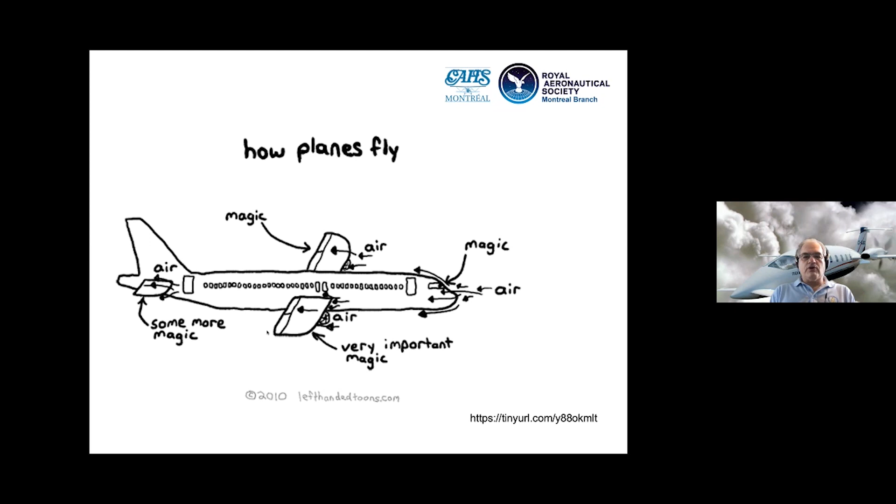Okay, so this is the first of the technical slides. I hope I don't lose anyone at this point, but this comes from a group called lefthandedtoons.com, and each of the slides has sources listed. Most of these are public domain slides, and the references are on the slides themselves. Their claim to fame is they draw all their pictures with their left hand, even though they're right-handed people, but I think it does capture almost all of the topic material for today. We see the air hitting the airplane, some magic happens at the front, some important magic happens in the middle, and more magic happens at the very end, and the end result is the airplane flies successfully.

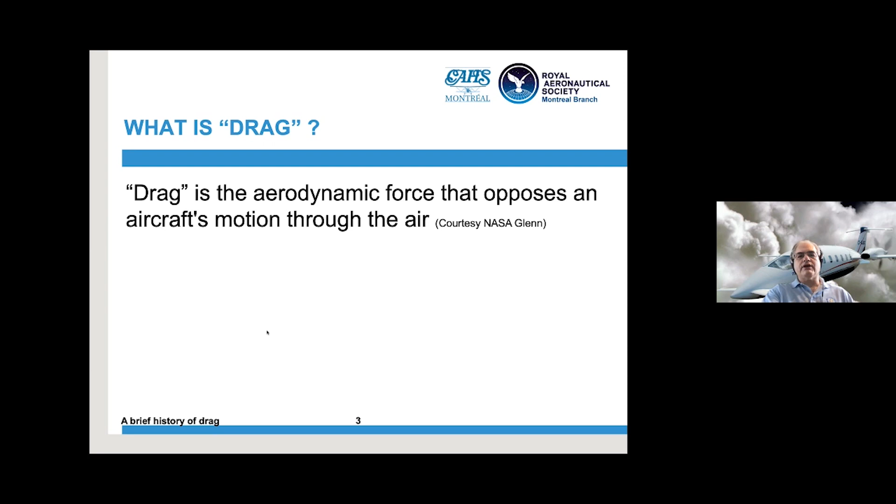So we're doing a speech on aerodynamic drag, let's find out what we mean by that. One definition from NASA Glenn, since I'd like to use high-powered sources, is aerodynamic force that opposes an aircraft's motion through the air. Okay, fair enough.

One of the key points about aerodynamic drag is just how long we've known the important science behind it, and just how long it took us to apply that successfully. So let's have a look at a few people and some dates.

Everyone in aeronautics has heard of Bernoulli's theorem, published in Hydrodynamica in 1738, and we'll see a theme that recurs: Bernoulli wasn't the one who published Bernoulli's equation. It was published by Euler in 1752, and there's enough there to more or less design any sort of subsonic airplane.

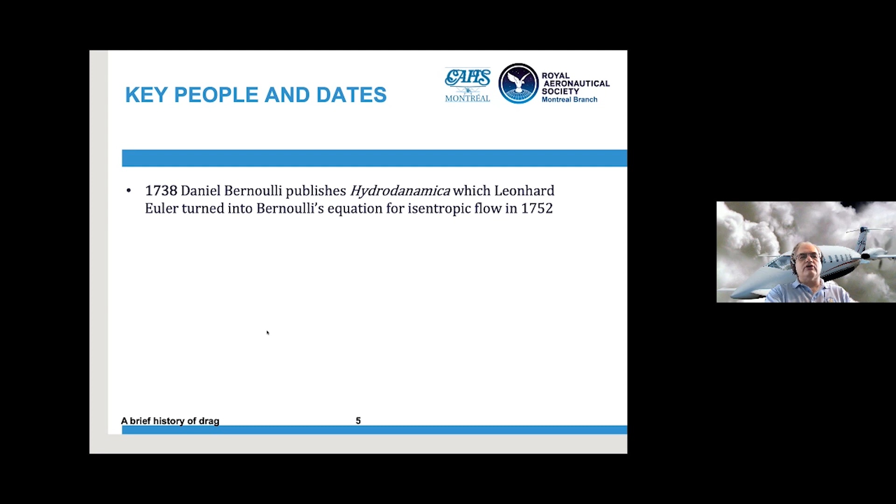A gentleman named Claude Louis Navier, with his colleague George Gabriel Stokes, derived a pair of equations called the Navier-Stokes equations of motion for viscous flow. The date is 1845, 60 or 70 years before the Titanic. These equations effectively fully define what viscous flow will do, and we'll look at them in detail a bit later on. 1845.

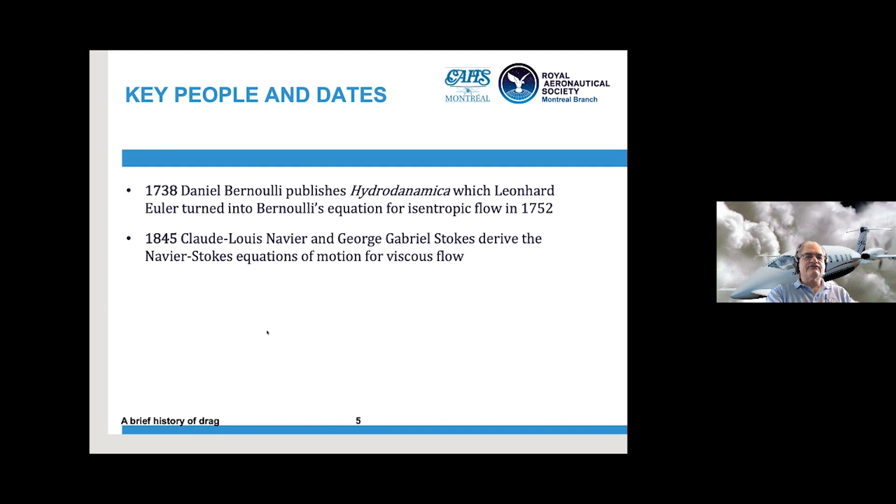Mr. Stokes was actually prolific, and he discovered another concept, which Mr. Sommerfeld decided to name Reynolds number after his friend Osborne Reynolds, who published it in 1883. So it took 30 years for Mr. Reynolds to publish Reynolds number, which wasn't even his invention - it was George Stokes' invention, publicized by Arnold Sommerfeld. So you can see the path can be somewhat tortuous before we get to the end. But Mr. Stokes did come up with Stokes' law, and the metric kinematic viscosity measure is called the Stokes, so he did get his claim to fame.

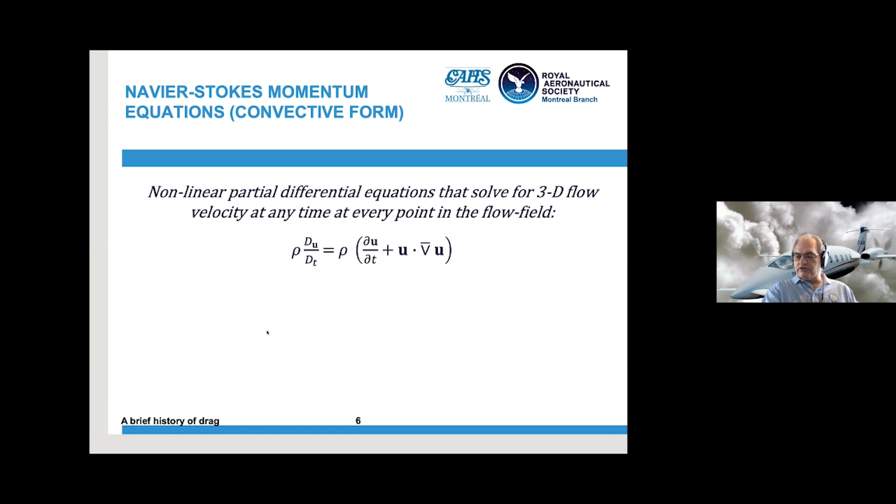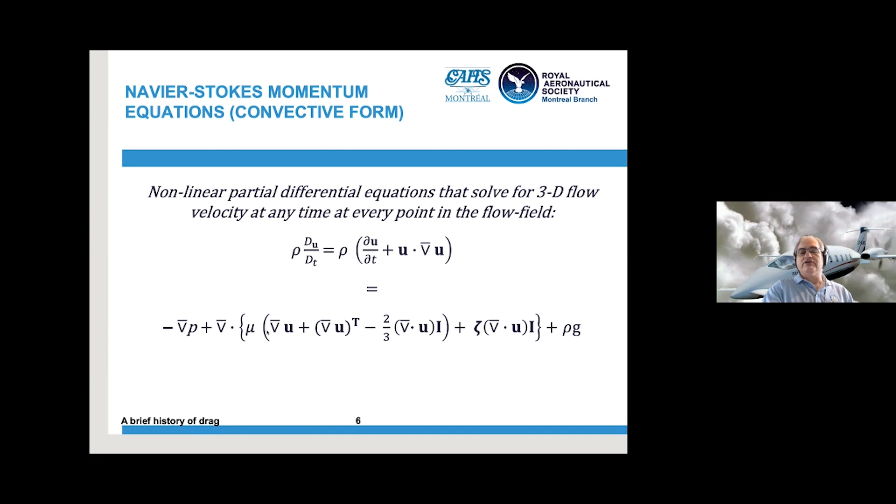All right, let's talk about the Navier-Stokes equations. I know all the aerodynamicists are dying to address these things. So here they are - a fairly straightforward continuity momentum equation, and the terminology is standard. nabla is divergence, nabla dot u is expansion rate. We can expand it relatively simply into this form, where we introduce zeta, the second viscosity term, volumetric viscosity, and then of course there's a hydrostatic term on the end. Pretty straightforward, as you can tell.

No, I'm just kidding. If you can solve this, the Clay Mathematics Institute has $1 million for you. It's been characterized as one of the most difficult mathematical problems to solve, and without gross simplifications, we don't even know what domain there's a solution of these equations across. What they do is fully define what the speed of a particle will do in viscous flow - viscous meaning sticky, think of treacle and honey as opposed to water. Ideally they'd give us the complete aerodynamic solution for every particle of air, if only we could solve them, but we can't. All we can do is make a bunch of approximations and then try to model around those. I just read a paper about someone solving these equations for air flowing over a surface with a step in it, and that's how much it had to be simplified.

These are the basis for all of our computational fluid dynamics, effectively, in the many forms that these equations have.

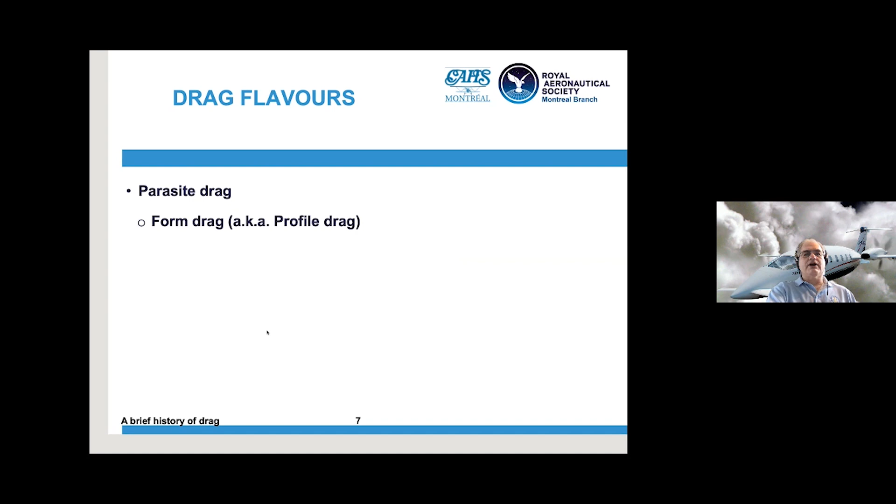Now let's get back to our main topic, drag. What kinds of drag do we talk about? Well, we have parasite drag, composed of form drag - sometimes called profile drag, which is drag arising from the shape of the thing you're flying around. Part of parasite drag is skin friction drag, we'll come to that in a moment - it's self-evident what we mean by that. Interference drag is when we have two components, such as a wing and a fuselage, butting up against each other, and the airflow doesn't know which way to go around that, which tends to cost us in drag terms.

We have wave drag, which results from the formation of shock waves. It happens anytime an aircraft is transonic, meaning that no matter what speed the plane is going, some part of the flow achieves sonic velocity. And then we have induced drag - drag caused by the production of lift, nothing else. If the wing is lifting, you have induced drag. So there's our drag story.

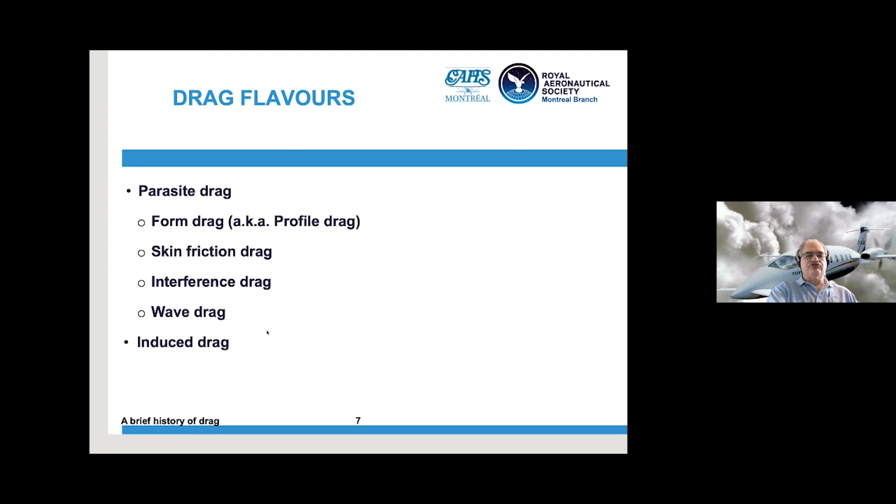We're going to look at each of these in turn. So parasite drag is everything except induced drag. As we said, it's profile or pressure drag.

It's caused when the boundary layer, the thin film of air adjacent to the surface we're interested in, effectively is as thick as from touching the surface, where the air doesn't move relative to the thing we're looking at, all the way up until the air reaches the same speed as the surrounding airflow, not affected by the skin of the vehicle. Boundary layers can be almost invisibly thin, a millimeter or two, or they can be inches thick, depending on the situation.

Interference drag we've discussed, and skin friction drag we're going to look at next.

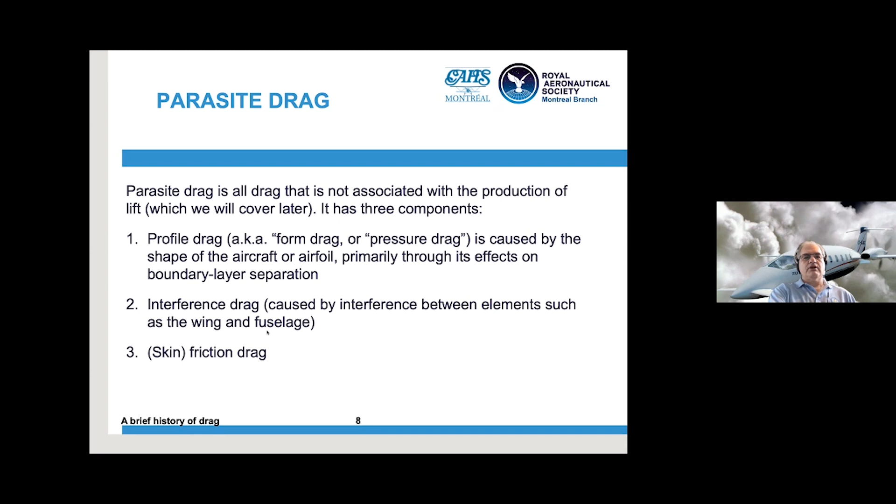I know that I said I promised to talk about the space shuttle and skin friction from re-entry. We know the space shuttle does whatever it is, 17,500 miles an hour, Mach 25, and it gets very, very hot because of skin friction. No, it doesn't. Skin friction has very little to do with it.

I think the easiest way to deal with this, I'm hoping — Fatty, give me a thumbs up for the cursor over the fuselage here. Yeah, okay.

So let's imagine that the air was a series of small sanding blocks like you would use in your workshop. We're going to take one of these sanding blocks at the nose of the vehicle and just scuff it all the way down until the very end of the vehicle, then taper off at the back. It doesn't take much imagination to realize the sanding block should be getting hotter and hotter as you keep scuffing, so that the hottest place you would see is at the very back. We start sanding and it gets hotter and hotter, and at the end the block is very hot and everything should be smoking.

Think about it — if it didn't, the fin wouldn't work, right? It wouldn't have an aerodynamic effect if it wasn't seeing a lot of airflow. But it's cool. It's absolutely cool.

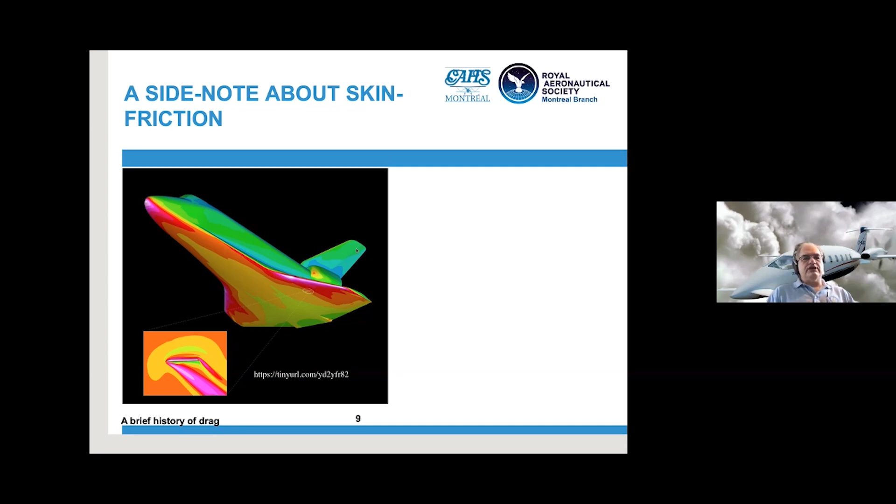So skin friction doesn't seem to be the culprit, and part of it is because the space shuttle, even at Mach 25, isn't seeing most of the dynamic pressure that it's flying through, and we'll see why in a moment. Let's look at a couple of statistics.

About 80% of the heating is caused by adiabatic compression. Adiabatic compression is when you don't add heat from the outside. The classic example everyone gives is the bicycle pump — you pump up your tire, the tire gets hot. Why? Because you're doing work to compress the air, and that work shows up, manifesting as higher pressure and higher temperature. So the space shuttle is effectively pushing a wave of air in front of it, which is causing the air to be compressed and hot.

It also causes shock waves, which we'll see in just a moment. But that's 80% of where the heat comes from.

And to give you an idea with a little bit of math, obviously the superheated air can actually break down the molecular bonds in the air and conduct and convect to the vehicle. Viscous friction, which is the stickiness of the air, does actually heat the atmosphere, but it's long after the space shuttle has gone by. It's all the turmoil amongst the molecules, exactly like when you stir a liquid very fast — it gets hot. That's what's happening there, but it's not what's affecting the space shuttle.

So in actual fact, a study by Alan Eggers in '58 showed that the heating varies inversely with the drag coefficient. What does that mean? Well, we'll have a look at that in a second.

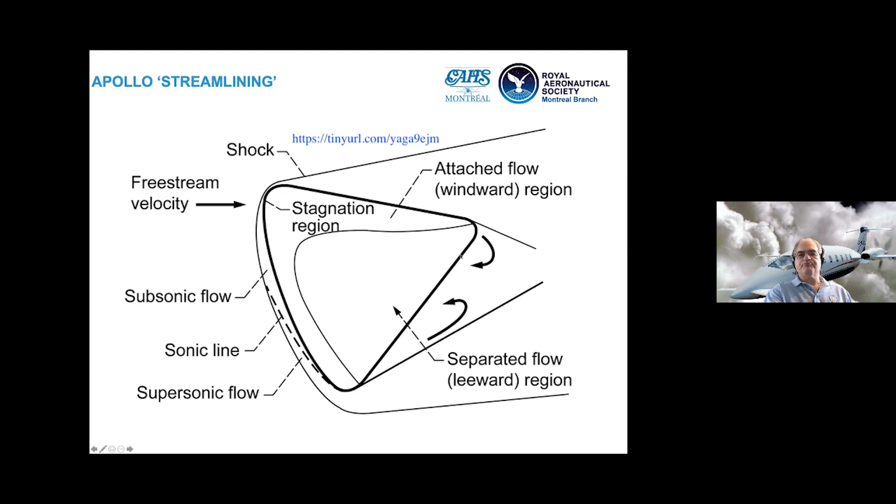Now, you can tell that Rockwell, when they designed the space shuttle, went to extraordinary lengths to streamline the vehicle. No, they didn't - in fact they haven't tried at all. If you look at the space shuttle, it is full of protuberances, tiles with edges on it, bumps in the cockpit. Looks a bit like a Vickers Viscount, if anyone's familiar with the Viscount historically.

You've got the OMS, the Orbital Maneuvering System pods at the back that are just strapped on like a Lego accessory. The wing has this DC-3 aerodynamic profile. There's almost no effort at all to streamline this thing.

And ironically, why is this? These things are seeing the same airspeed as the space shuttle sees when it re-enters, the same actual dynamic pressure as the space shuttle sees. I hear groans from the crowd - that can't be right. Well, let's have a look at some space shuttle numbers.

The target velocity is 290 knots equivalent airspeed - just think of that as the airspeed that the space shuttle feels. Now, how can it be so low? Well, there's a couple of reasons. One is, as I said, there's a shock wave that slows the air in front of the space shuttle as it's re-entering, and by the time it's subsonic, it really is seeing that low an airspeed.

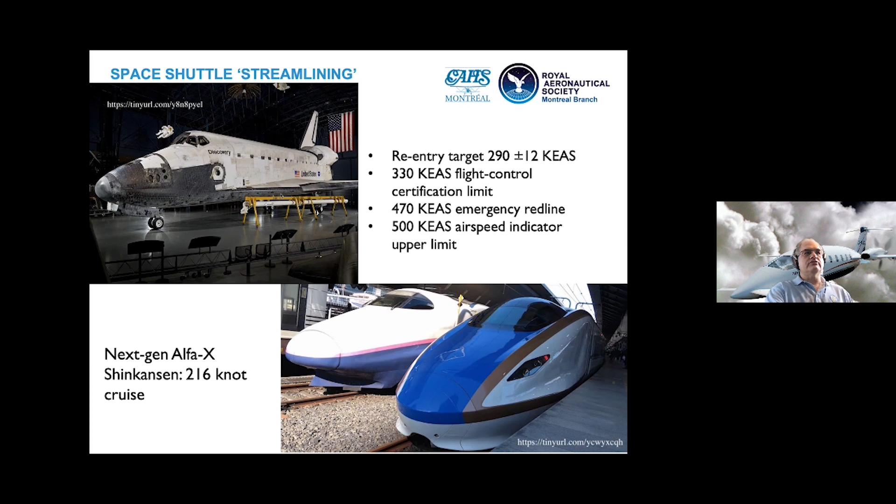In fact, the control surfaces on the wings during the shuttle's ascent, most of their effort is to try and relieve the wing bending moments so that they don't break the wings off. So the surfaces actually move not to control the vehicle, but to reduce the flexing on the wings as it ascends.

Back to our historians - so the aerodynamicists can go and refill their coffee at this point.

The Wright brothers wind tunnel here - a 30-mile-an-hour wind tunnel, 1901. You get an idea of the scale because they conveniently provided us the bicycle wheel, and it also historically, the context, of course, they were bicycle makers. Amazingly prescient to come up with a wind tunnel. We take these things for granted, but there weren't wind tunnels in that era, and they not only invented the airplane, but they invented the technology to invent the airplane. But it leads to some problems.

I'm going to go back to the aerodynamics for a moment and look at the drag equation. It's not complicated, and we'll just spend a moment on it. Unlike the Navier-Stokes equations I was kidding about, this is relatively easy.

D is our drag, and drag is a force, so it's measured in force units, whether newtons or pounds force, depending on which country you're in. Rho is the density of the fluid, the air density, the atmospheric density. U is the velocity - U for velocity, not V. We use V for something else in flight testing. We use U, V, and W, and they're not the way you'd think. So U is the velocity.

As you can see, there's a squared term in the middle. So double the speed, 4 times the drag. And in fact, power depends on the cube of the speed because of the relationship between power and force. So if you want to double the speed, you need 8 times the power. That's why you don't see a lot of supersonic propeller airplanes out there.

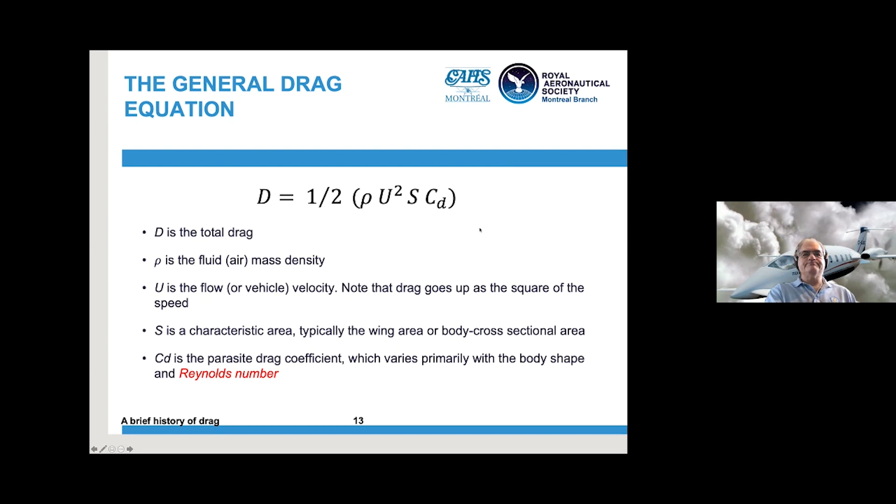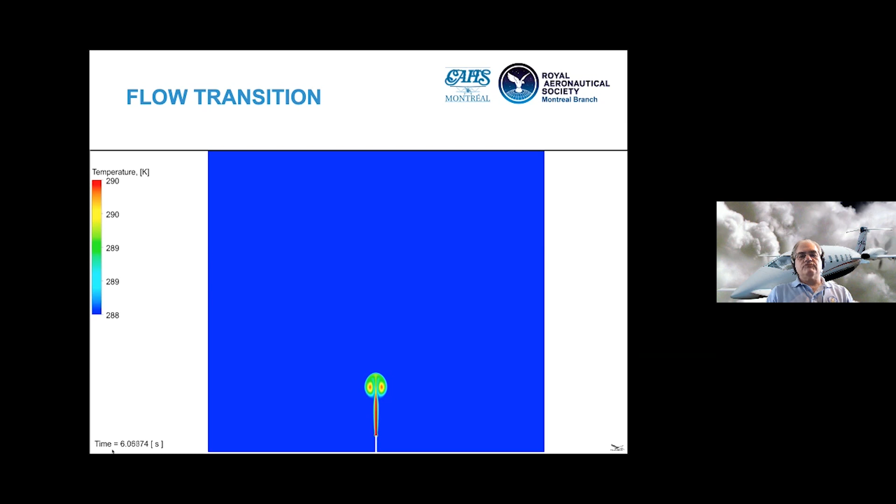We'll take just a moment to have a cigarette, if I can make this work. What you're seeing is a smoke plume coming up from the bottom of a cigarette, and you can see it's straight as an arrow as it starts up. It's ascending by convection - it's hot, so it goes up relative to the rest of the atmosphere. Notice how it's laser straight. By the way, if this was a tap with water coming out of it, it would have the opposite effect - it would start pouring straight, but look what happens here.

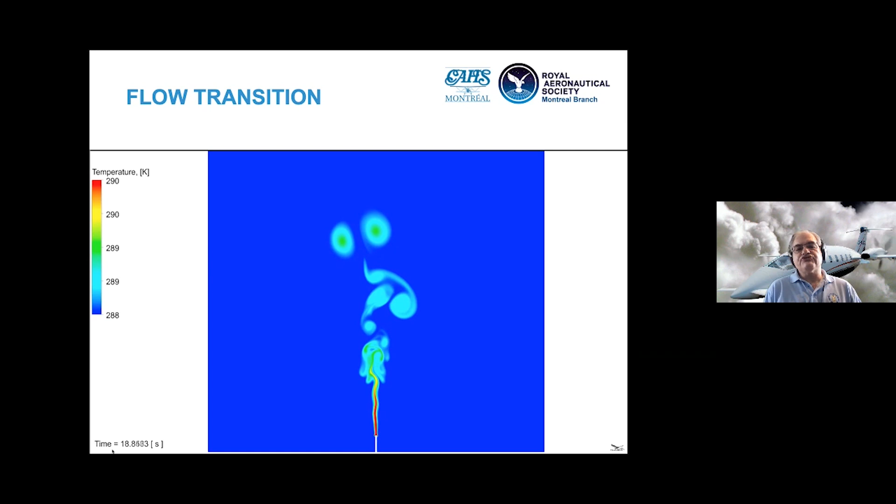For no apparent reason, the flow first starts to get wiggly, and then it breaks up into these vortices. What you are seeing, if it were a boundary layer next to an airfoil or a fuselage, is a transition from a laminar boundary layer, which is the straight bit on the bottom, to a turbulent boundary layer, which is the connected oscillating bits halfway up, to a separated boundary layer, which is all the turmoil vortices you see up high.

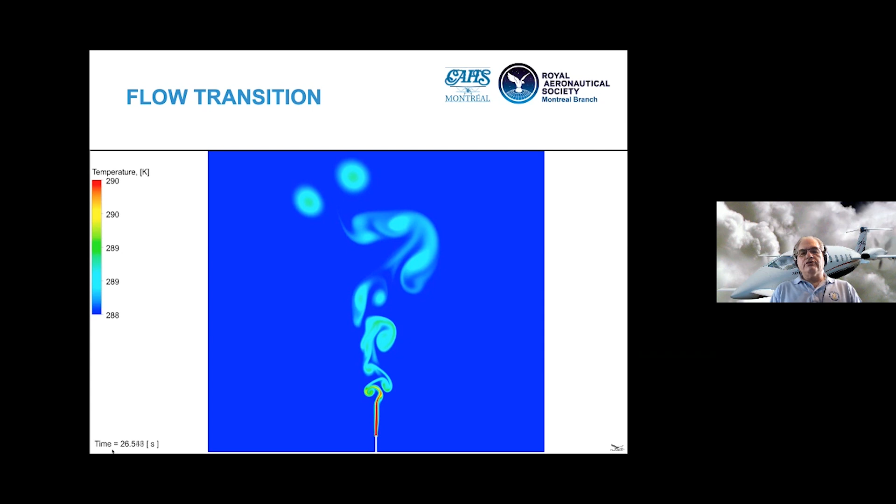For a given air density, the transition between laminar, turbulent, and separated flow is strongly a function of Reynolds number. Basically, if you think of a wing, the airflow starts flowing over the front of the wing, generally in a laminar way. It doesn't hang on laminar very long, usually - it becomes turbulent, the boundary layer becomes turbulent but still attached to the wing, and then it eventually separates towards the back of the wing, and that's what we have.

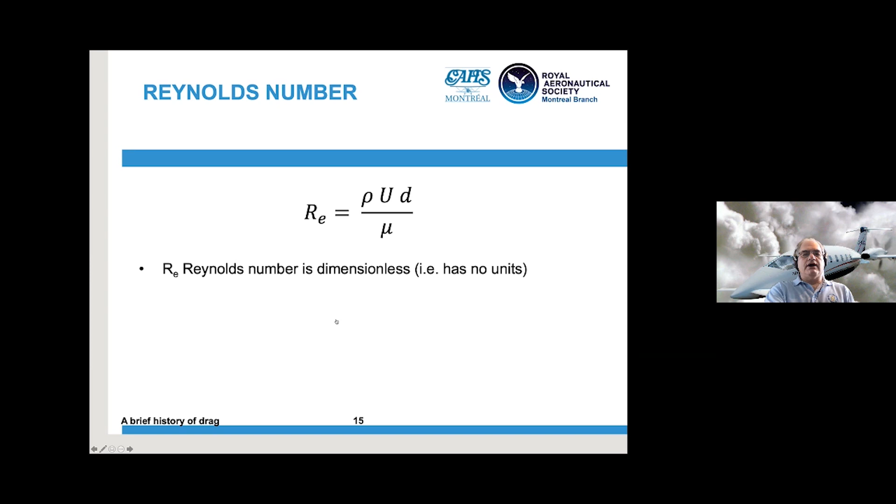So let's have a look at Reynolds number. Again, a very simple equation. The point of Reynolds number is it has no units - it's just a number, like Mach number. You can see some familiar terms already. By now, you're all instinctively aware that U stands for velocity. There's our rho again for density. D is a dimension - how far back on the airfoil is a typical dimension. And mu is our viscosity, the stickiness of the fluid.

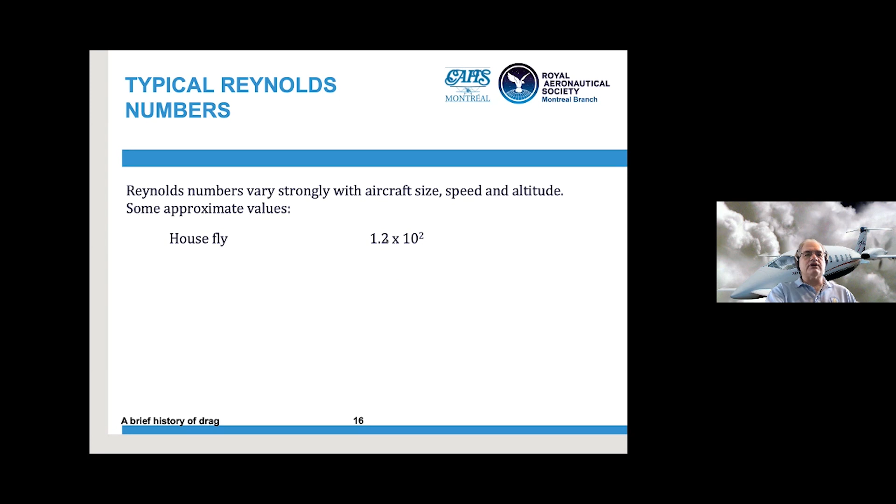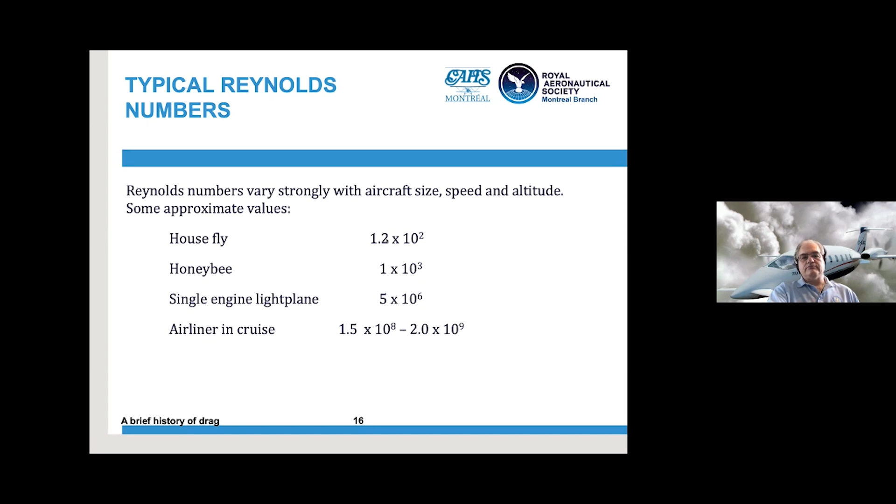So let's have a look at how nature handles Reynolds numbers, and then we'll see what the effects are. Here's a dragonfly, operating at those tiny Reynolds numbers we set up, on the order of 100. What you notice is the airfoils on this thing are flimsy and thin, and nature has a way of coming up with the most efficient solution, so this obviously must work as well as anything else. The honeybee has these thin, wispy wings as well.

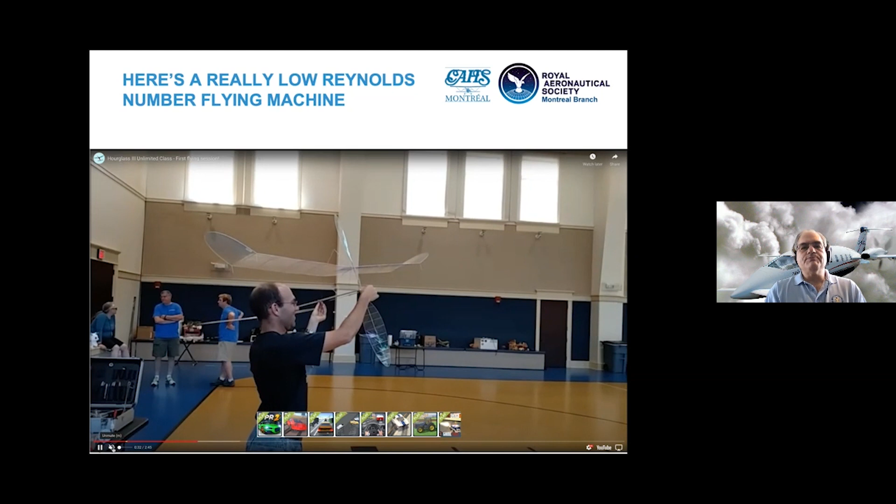This is what a vehicle designed for low Reynolds number looks like in flight. A couple points I want to make: notice the thin, wispy wings, and the incredibly slow velocity. This is not a hot air balloon, right? This is an airplane that's apparently floating in air. It doesn't seem to obey the equations we would expect it to.

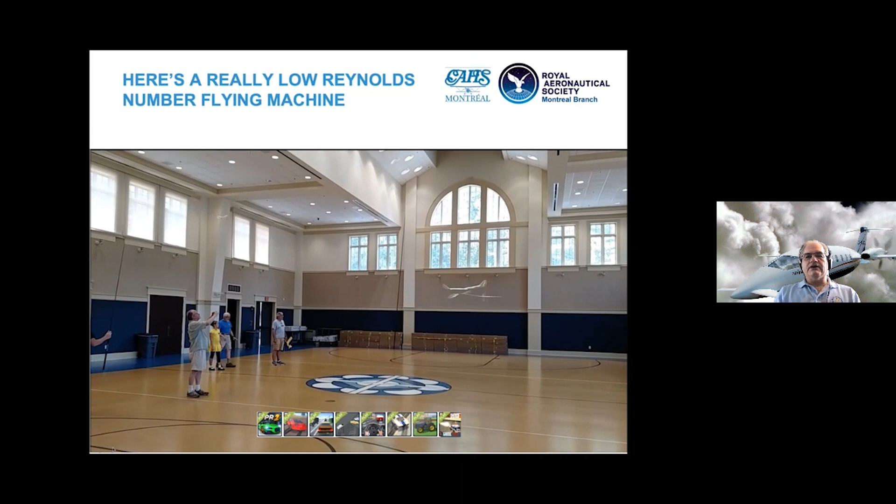You can see that another consequence of building an airplane like this is structurally it's a disaster. It's flexing and bending. In fact, the first time we tried to fly this thing, it folded in half. But clearly neither the propeller nor the wing nor the tail of this thing are obeying aerodynamics as we would understand them.

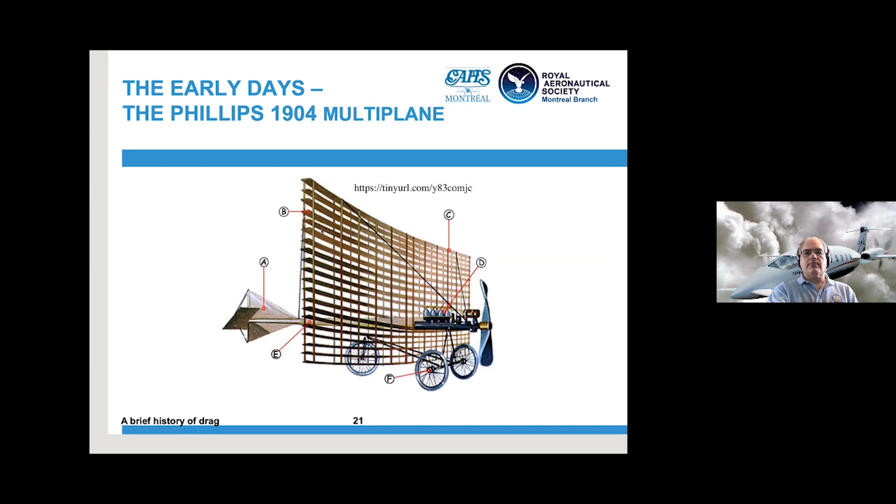Well, when you make a wing this thin, it's catastrophic for a number of reasons. Number one, and I think it's really obvious, you have to brace the daylights out of it because structurally it has no strength at all to resist aerodynamic loads like lifting or twisting loads, which all wings tend to produce as they produce lift. So what do we have to do? We have to add struts and bracing wires.

This airplane had roughly 2,000 meters, 2 kilometers of bracing wires on it, roughly 1.2 miles for our friends in the States. So that's an awful lot of wiring.

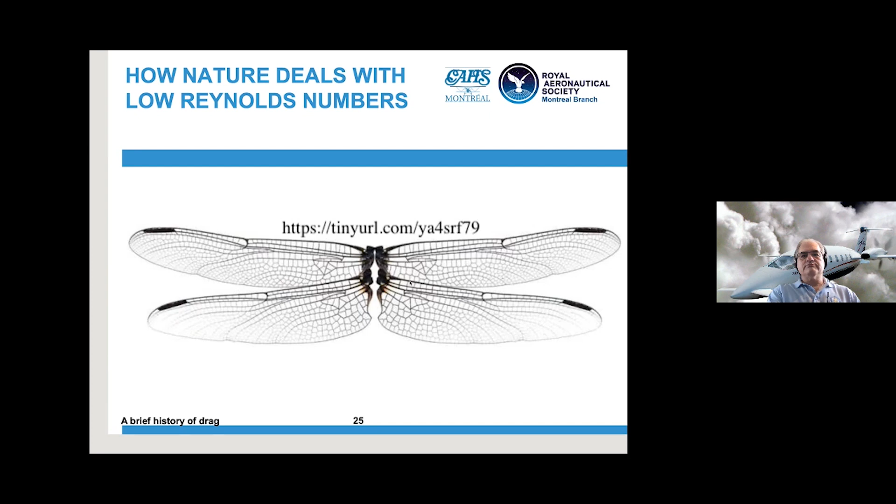Now I'm going to show you a little bit about the effects of drag. We talked about laminar flow and so on and so forth, and Reynolds number, and we'll have a look at a couple of shapes that we know quite well.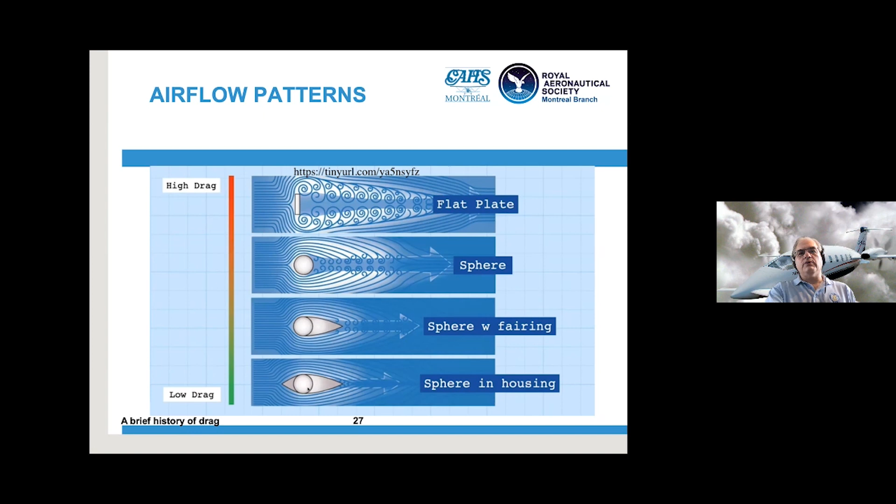Remember our drag equation had coefficients of drag. Let's take a look at some representative coefficients of drag. To understand what these are, for something that's the same size as another thing, the coefficient of drag will tell you how much more the drag is, the relationship of the drag between the two objects.

So take the first two here. A flat plate, edge on, has this coefficient of drag. A streamlined airfoil has roughly 50 times the drag of a flat plate. But the airfoil does a heck of a lot better than the flat plate at producing lift, so we take that compromise. And you can see where a typical car fits in.

Here's where our ball fits in. Look at it compared to an airfoil, a streamlined airfoil. It's almost 10 times worse. It's 10 times worse to fly a ball. Okay, solid hemisphere—sorry, it's a half ball, and this is a full ball. Awful. But take a look at a wire or a strut, 1.2.

So inch for inch, foot for foot, meter for meter, our airfoil has a coefficient of drag orders of magnitude less than our wire or our strut. So although our forefathers thought that the wings were producing most of the drag on their SE5s and on their Capronis, the exact converse was true. Actually, what the engines were fighting almost exclusively was to haul all the wires and struts around. And the airfoils themselves were almost in the noise.

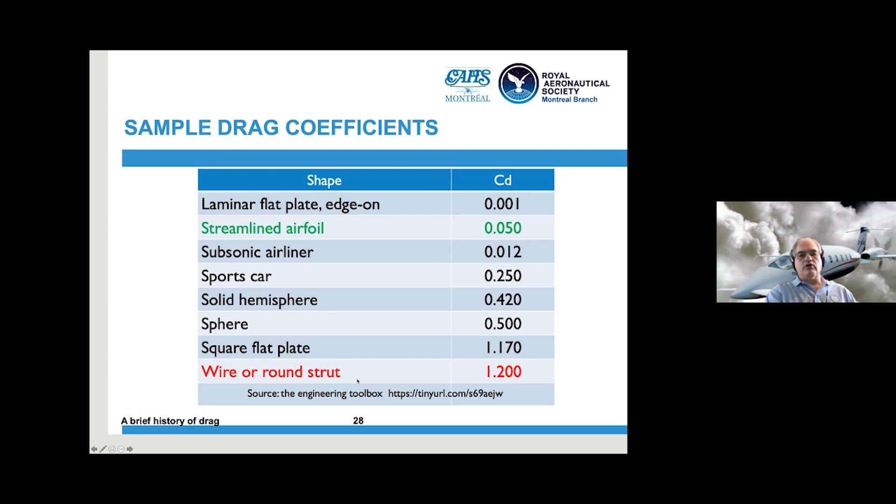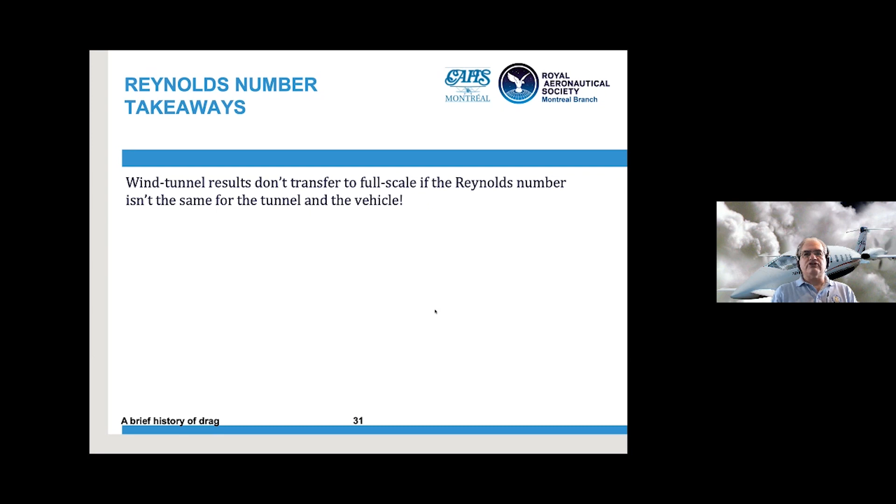So what are the takeaways? The wind tunnel results just don't transfer if you get the Reynolds number wrong, and it's a problem we have. If you remember the Reynolds number equation, one way we can make it work in a small wind tunnel is by changing one of the other factors, the velocity or the density. Now when we change those other factors, other things go wrong, such as transonic effects getting messed up if we change the velocity. But at least we can come up with something like what the airflow should be, because of this laminar and turbulent boundary layer. And this led, as we've seen, to horrible compromises.

One of the things I didn't talk about when I talked about thin wings is not only do we need to strut brace them, but now we can't put fuel in them. Putting fuel in the wings of an airliner is one of the things that stops you having to make them massively strong, because the fuel resists the wings trying to bend up and join hands on top of the airplane. It provides wing bending relief. So fuel in wings is good - it actually stops you bending the wings upwards, or reduces the bending, until you land when it's bad, and means you can make the wings less structurally intense.

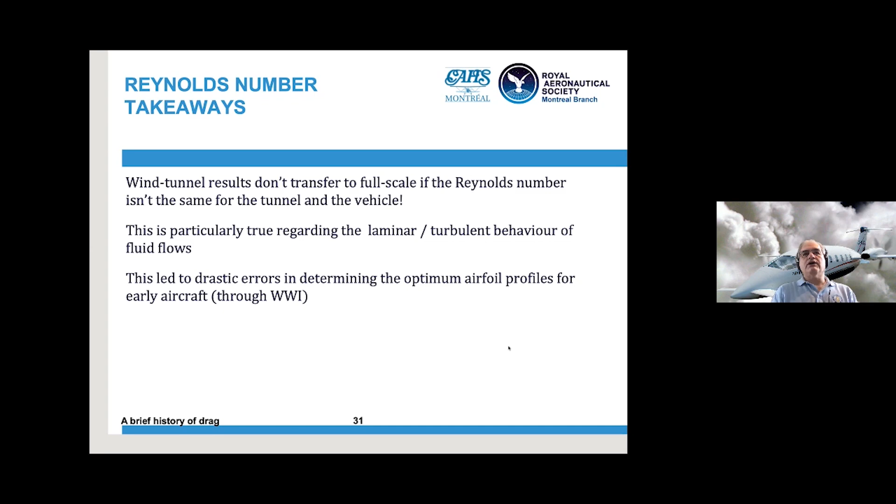Also, if you're in a fighter plane trying to put things like guns and so on - if you have a membrane wing, you can't bury anything in there. If you have a wing with some depth to it, you can actually do that. So there are many disadvantages that led from having too thin a structure.

Let's talk about induced drag. Induced drag is drag due to lift. It's categorically a different beast than the other kinds of drag we've seen so far.

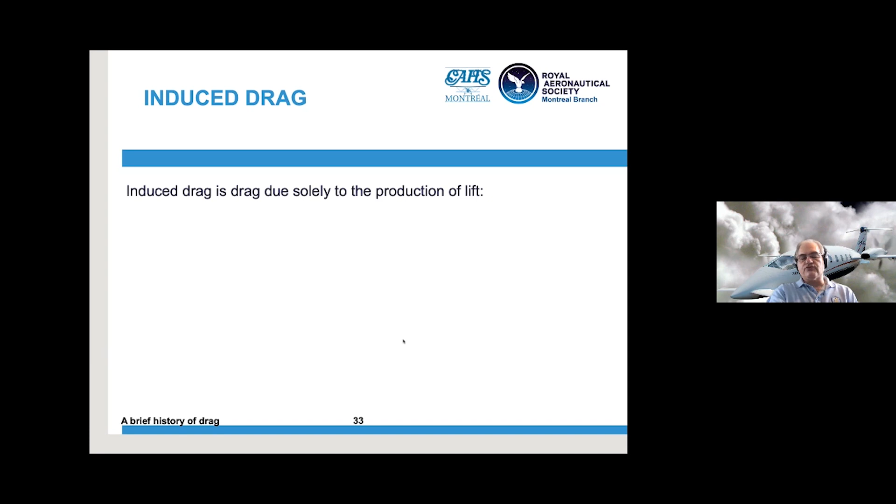Airfoils are sucked into the air, basically. There's low pressure on the top, which is the main factor that makes your airplane fly - it's the low pressure on top, not the high pressure on the bottom, although there's a bit of both, that sucks the wing up into the air. Now if you have high pressure on the bottom of a wing and low pressure on the top, those two will try and equalize. They can't do it wherever the wing or the fuselage is in the way, so the only place they can do it is the wingtips. That's where you've left an escape path for the air underneath the wing to spill over and try and equalize the low pressure on the top.

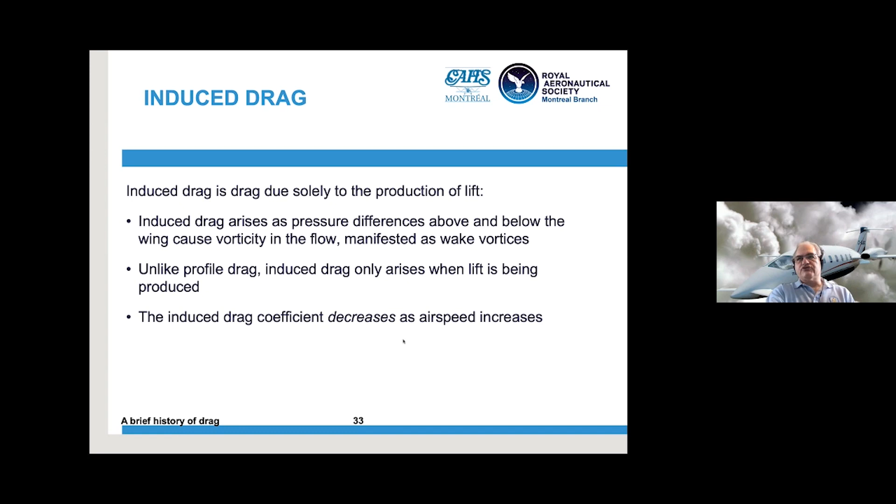Because of that, we only see this induced drag when we're producing lift, because that's when these pressure differences are high. And because of some of the mechanics that I'll go through, the induced drag reduces as you go faster. Unlike the other kind of drag, which is a function of the speed squared, the induced drag is inversely proportional to the speed squared. Another thing that stops induced drag in its tracks is ground effect - ground effect is when you're within about one wingspan. Span is the distance from wingtip to wingtip across the airplane.

If you're within about one wingspan of the ground, induced drag goes away or reduces significantly because the air no longer has the ability to curl around like it had. The ground provides a kind of buffer that we'll see in effect in a minute.

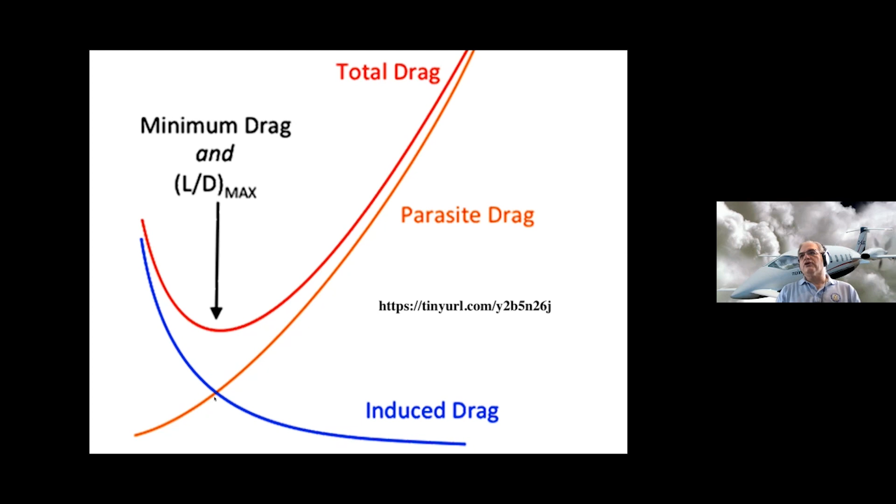That corresponds to a number of important airspeeds for a pilot, not least that it's the best gliding speed, because the glide ratio of your airplane is numerically equal to the lift to drag ratio. That's why airliners can glide a lot better than most light planes, because they are very clean and have very low drag.

So a typical airliner can glide 150 miles from cruise altitude. In fact, a normal descent for an airliner is essentially a gliding descent. If you have a lift to drag ratio of 20, which is not atypical, that means you can glide 20 miles for every mile you are up - 20 miles for every 6,000 feet.

Another interesting thing about this curve: if you go slower than this minimum drag point, look what happens - the drag goes up. So it takes more thrust and hence more power to fly slower. That means below this region, which is where a lot of airliners come in on approach, and certainly many fighters come in, the airspeed is unstable.

If you go slow, you have to go slower - you need more power to go slower, and so you'll slow down more, which needs more power, and you'll slow down more. This was the case when I used to fly one particular little airplane, the F5, or the T-38 to the Americans, or roughly equivalent.

We used to do air-to-air refueling behind a C-130. We'd be operating our F5 down here, the C-130 would be operating as fast as it could go, and we'd be going about as slow as we could go - just able to hook up to the fuel hose.

What did that mean? Well, our drag was enormous. In fact it was so enormous we had to fly in afterburner on one engine to stay fast enough to keep up with the Hercules. We didn't have afterburner in both engines because it was too hard to control.

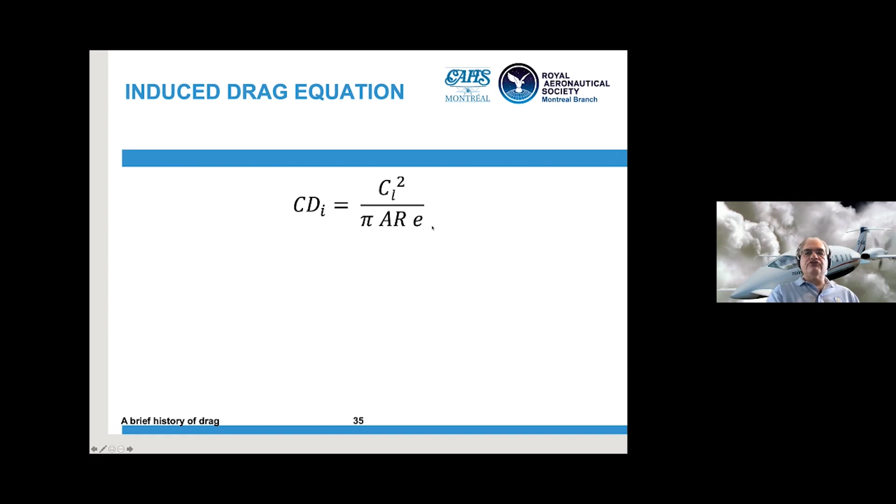AR is aspect ratio - how long and thin the wings are compared to their breadth, the chord line. I'll show you pictures in a minute. And then this is an efficiency factor. As you can see, as the lift coefficient increases, which happens when we go slower, the induced drag increases - big is worse. And as the aspect ratio increases, as the wings become skinny with very large wingspan, the induced drag decreases.

If we can make this efficiency factor good, we reduce the induced drag, because the smaller it is—it doesn't go above 1 typically—the smaller this efficiency factor, sometimes called the Oswald efficiency factor, the bigger the induced drag becomes. So we want to keep this factor up high.

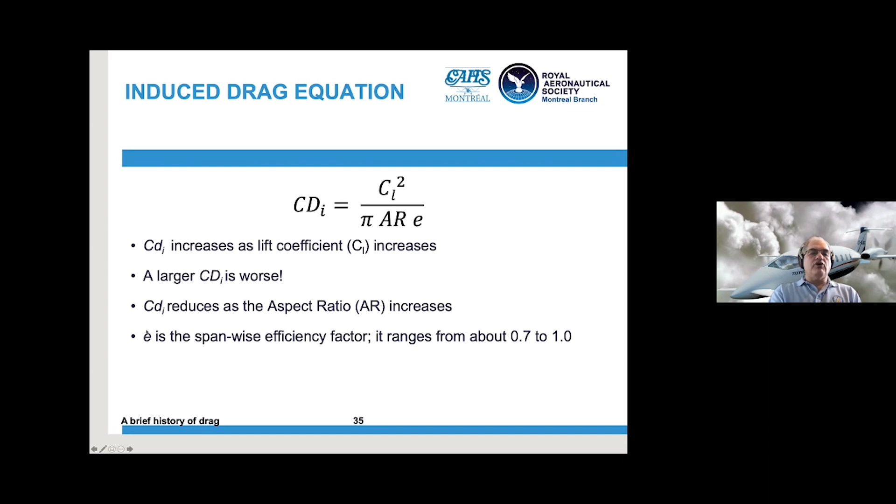This factor depends on the shape distribution of the wing. It turns out that the optimum distribution based on trigonometry is elliptical. The optimum lift distribution span-wise is elliptical. So I've drawn a couple of ellipses on a piece of paper, which gives us an efficiency factor of 1 when we draw the perfect shape.

Here's a pair of ellipses. They're identical ellipses, except their semi-minor axis is a different length. This is an optimum shape to reduce the induced drag by keeping the efficiency factor close to 1.

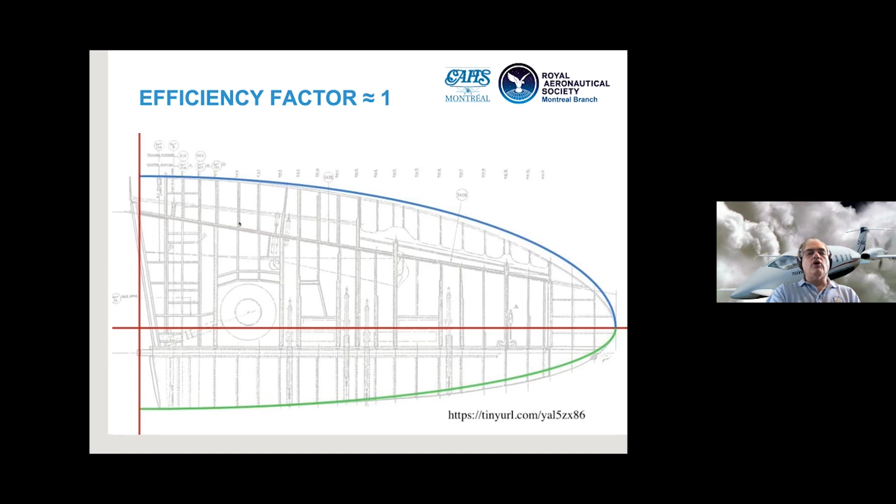I think you all know where I'm going with this. All the historical buffs will know immediately. R.J. Mitchell, who designed the Spitfire, was an absolute adamant believer in optimizing this. And this is those pair of ellipses.

Notice it looks like some vortex generators here—I'm not sure if that's what it is, but I think it could be. You can see the elliptical form of all the control surfaces in an effort to reduce the induced drag. Notice it's a big fat airfoil—gone are the gossamer wings we had before, which means we can now put weapons in it. Here are the machine gun ports, and we can put fuel in it should we choose to.

The Spitfire had its fuel in the fuselage, but we could put fuel in here and reduce our wing bending. The Germans were not out of the picture either, but they were a bit more pragmatic. They said, yeah, it's good to have this optimum factor, but why don't we just provide the taper, but build something that's a heck of a lot easier to mass produce than this beautiful artistic rendering.

So they used straight lines wherever they could, which made the mechanics of mass production a lot easier. And they said, we don't really care about the induced drag coefficient of the tail—the whole thing is only there to keep the thing right way up, so I won't be as pedantic as RJ was here. It's a bit less than a 1 efficiency factor, but it achieves more or less the same aim while achieving the compromise of structural manufacturing ease of use. Kurt Tank, a brilliant aircraft designer in his own right.

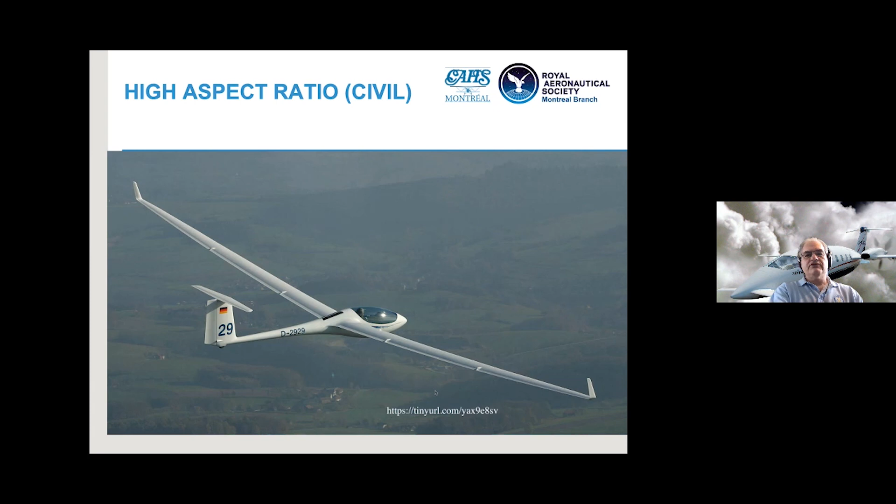So when you can't make the wings any longer, what you do is add these winglets, and they interfere with the formation of the vortices to the extent that in an efficient installation, they actually compensate for their own profile drag with the reduction in induced drag, so you get a freebie.

You might ask, why don't they just make the wings longer, which is almost identical in effect? Structurally these are very difficult to compute because they have twisting effects and other complications. The answer is, on very large aircraft like the 777 and so on, if you made the wings longer and longer, the airplanes won't fit in the gate. You simply won't be able to park them at the airport.

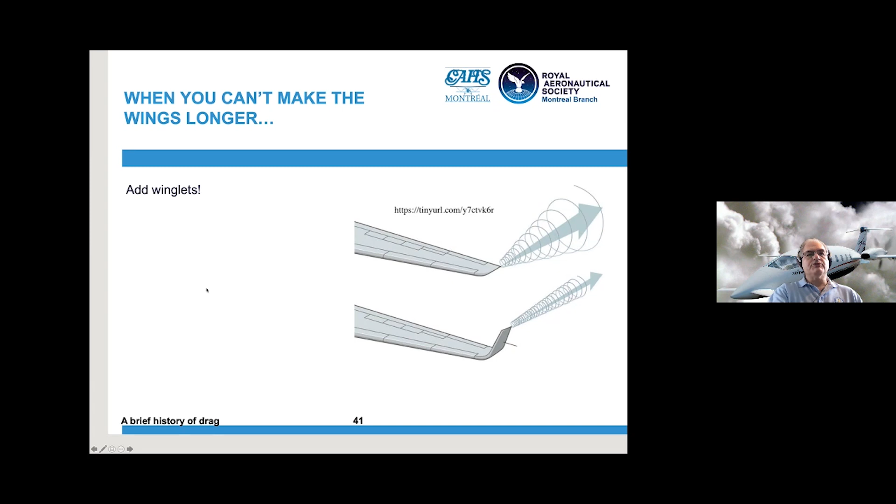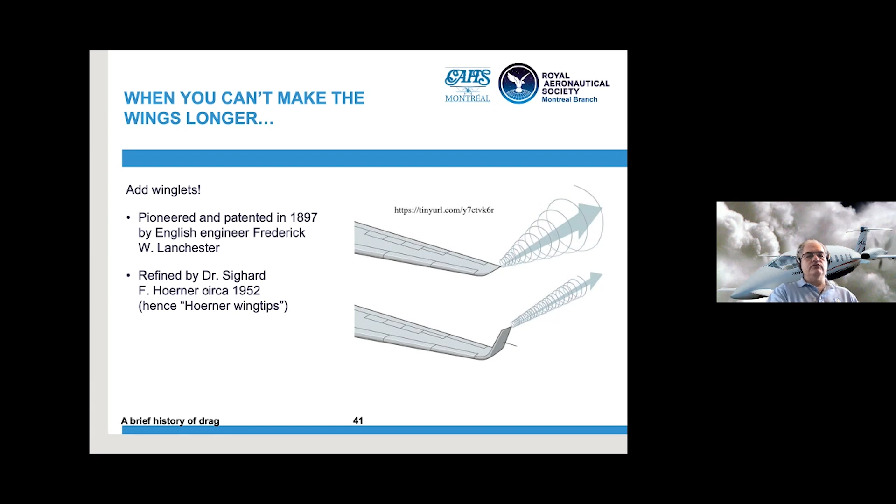Frederick Lanchester, look at the date, 1897, had already sorted out winglets, compared to the early 1900s when people were starting to fly. Hoerner, in 1952, reinvented these, and you can still buy Hoerner wingtip mods for Piper Cherokees. Richard Whitcomb, one of my aerodynamic heroes, popularized them in the 70s. Richard had a penchant for finding old ideas, reinvigorating them and reapplying them, and winglets was one of his. Brilliant aerodynamicist. We'll meet him again soon.

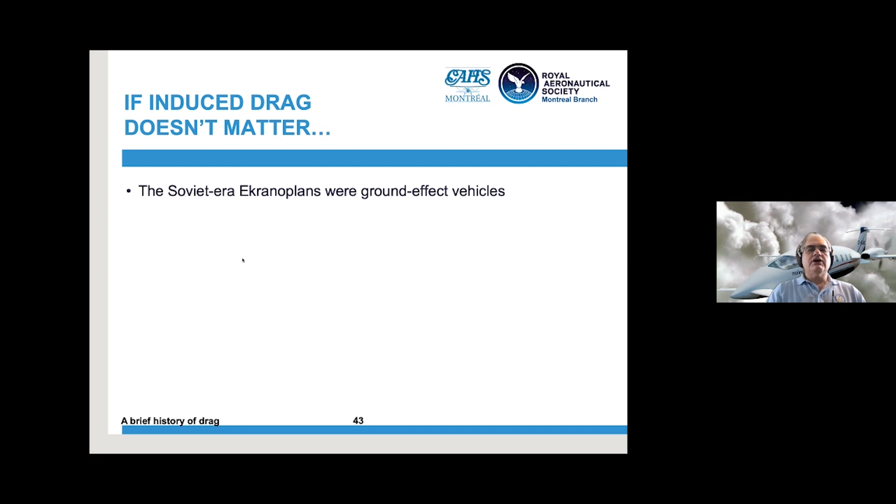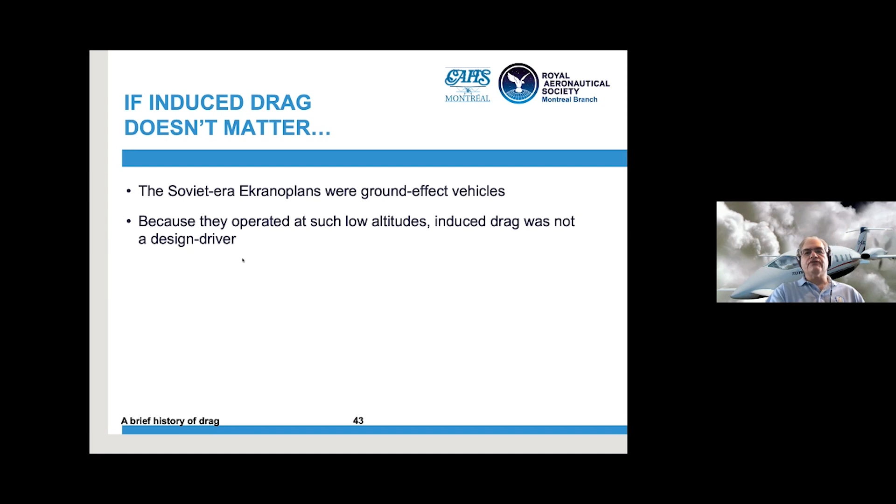Now, what happens if induced drag doesn't matter? The Soviet Ekranoplans were ground effect vehicles. Remember, ground effect is when we're within one wingspan, and these were typically flown over water, flying boats if you will. If you get that close to the water, induced drag is not a factor. So Rostislav Alexeyev ignored aspect ratio, efficiency, and all kinds of other things, but achieved some amazing results by flying in ground effect.

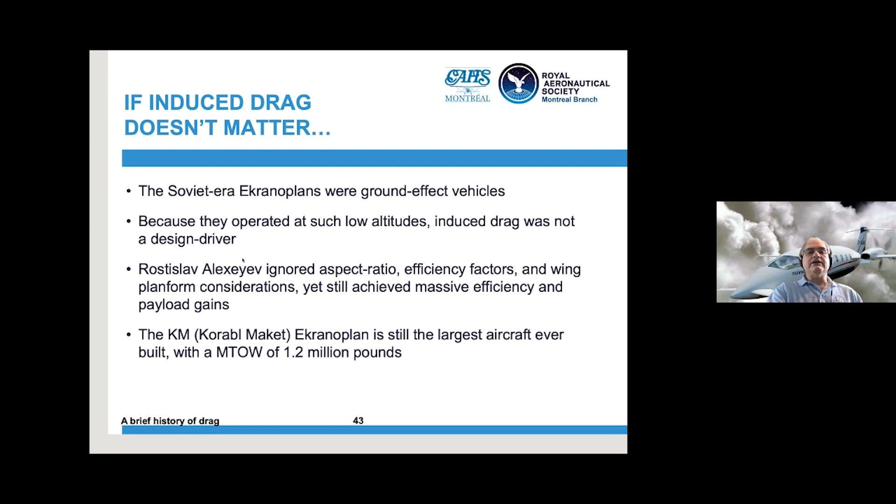We're going to look at the Ekranoplan, which I believe is the largest aircraft ever built, with a takeoff weight of over 1 million pounds. It makes the A380 look small, being 60 feet longer than the 380. Let's have a look at this beast.

First of all, everything we said about making a wing efficient has been thrown in the garbage here. The aspect ratio is effectively a half—well, it depends, it's actually 2, the wingspan is roughly twice the chord. There's no effort at taper, no effort at efficiency factor. Yes, there are kind of winglets, but that's mostly to get this thing off the water. You can see they have given up completely on any attempt at reducing induced drag.

Except back here—this thing, the tail, is out of ground effect, above one wingspan. Remember, this thing is as big as a city block, so the tail is way off the water. Notice that all of our friends we've seen already are back in action here: the taper, the thin airfoil, the aerodynamic profile, as opposed to the thick, stubby, non-aerodynamic airfoil of the main wing.

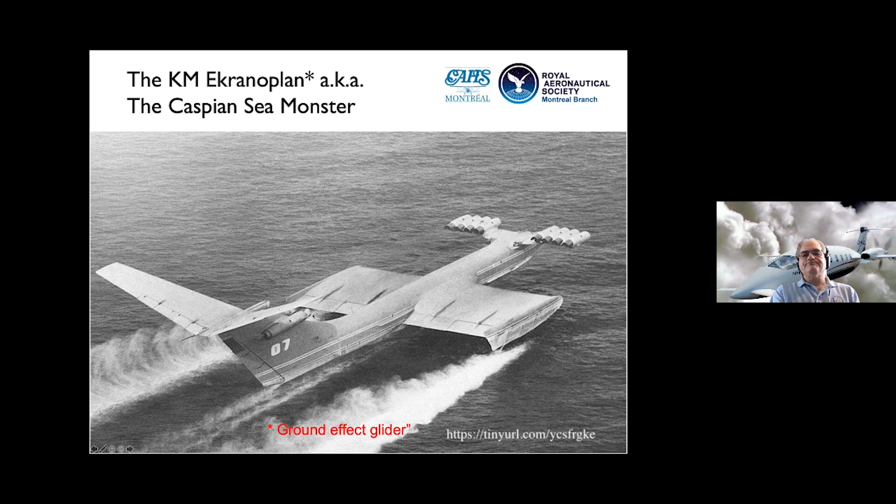So here's this thing flying. Proves it does fly. You can see the effect of the winglets here, effectively stopping the vortices from developing. There's an idea of the scale. Notice the huge aspect ratio of the tail. These engines are firing right now, but allegedly what will keep it flying is just the little engines on the back.

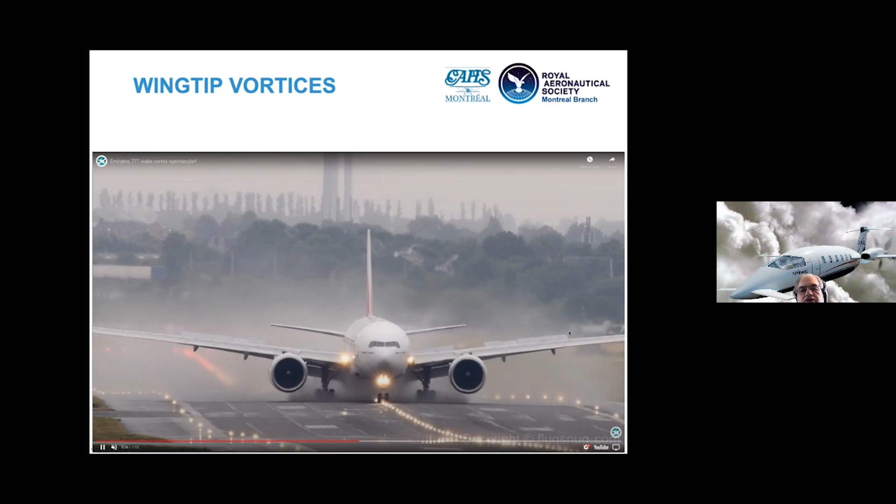Look at the vortices being shed, and watch what happens when it touches down. It's still going the same speed, effectively. No more vortices, no more shedding of vortices, no more induced drag. Now you can see all the spoilers, because we want some more drag and we want to get the weight of the aircraft on its wheels. And some more drag by the engines reversing.

So that's induced drag getting unwound. That's why when they teach us how to avoid vortices, they say make sure you are on the ground past the point where his nose wheel touches down. In other words, overfly him and land here. Or if he's taking off, make sure you are airborne and above his flight path before his nose comes up.

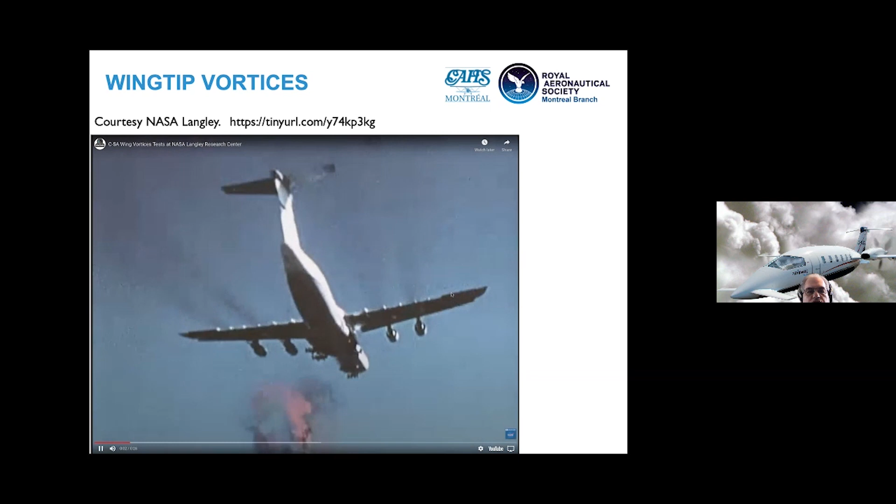Now here's a C5 flying over a mast. This is a NASA Langley video, and they've added smoke to help us visualize these vortices. I'll ask you to guess which wing we're seeing the vortex off here. Well, it curls from high pressure to low pressure, it's got to be going around the right wing. So this vortex—there are tornado strength winds here, I should say.

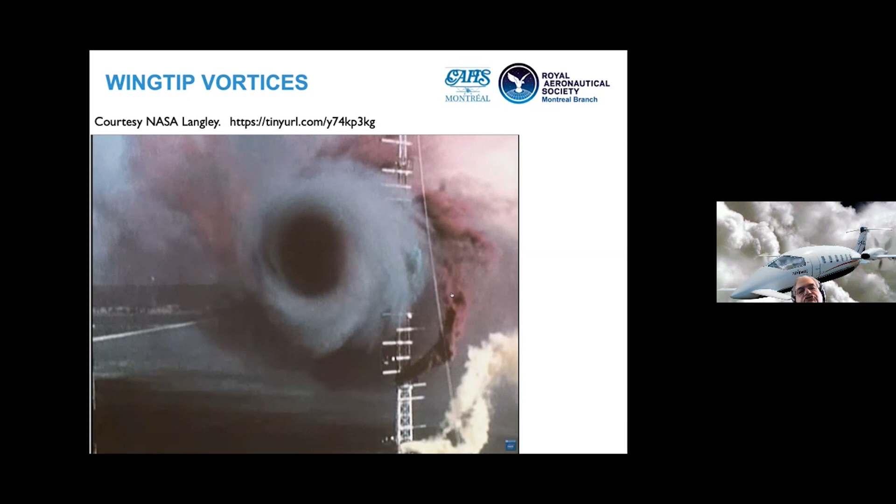It's flying into one of these that took down the XB-70 Valkyrie, when the Starfighter got caught in one of these. It'll just flip you over on your back and then put you into it. So you can see it's a very profound thing.

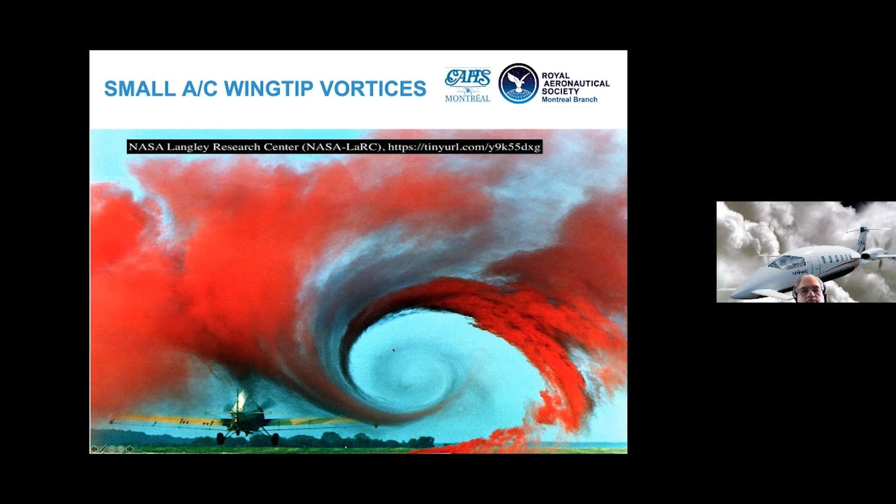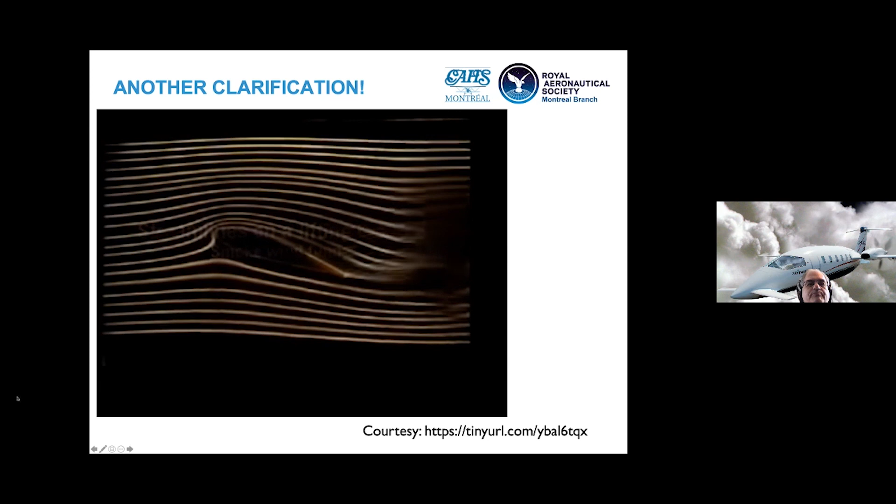Nice parallel streamlines of air hit our airfoil. Notice the boundary layer, it comes across laminar, and then eventually you'll see it thickens and then it separates. The first thing is the air does not go faster over the top of the wing because it has to catch up with the bottom air, which has a shorter path. You'll actually see they don't catch up with each other. They don't synchronize.

Right? There is no way that this is synchronized with its partner here. So that explanation that the air goes faster over the top because it's got a longer way to go, that doesn't wash. The second thing is you see the air, you see all these happy air molecules in these striated laminar air layers, and you can see how the airfoil lifts.

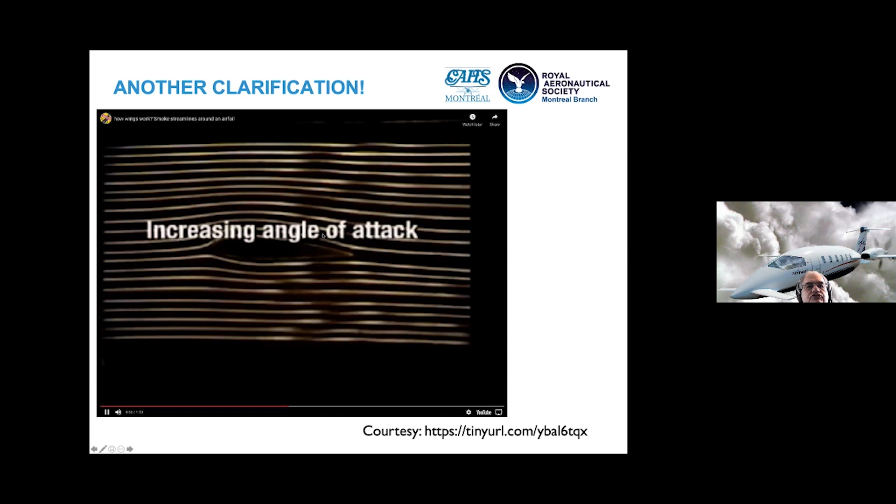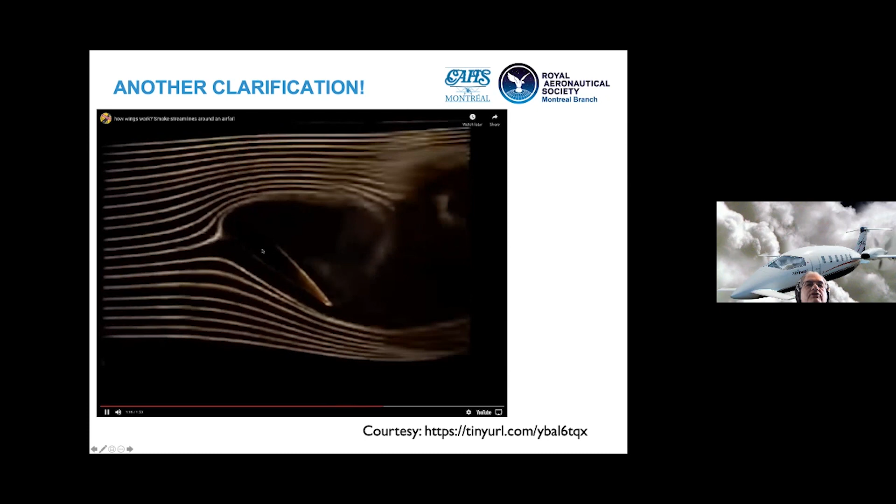We'll see the angle of attack go up. The pressure gradient is adverse, it's bad, so the molecules have more and more trouble staying attached to the wing, starting at the back and moving forward on this particular airfoil. And you'll see it's separated here, and eventually the whole airflow lets go and goes, I can't do anything anymore. And in fact, in this region here, you will eventually see air flowing backwards, curling back and flowing the wrong way up the airfoil. Now, why is this picture wrong?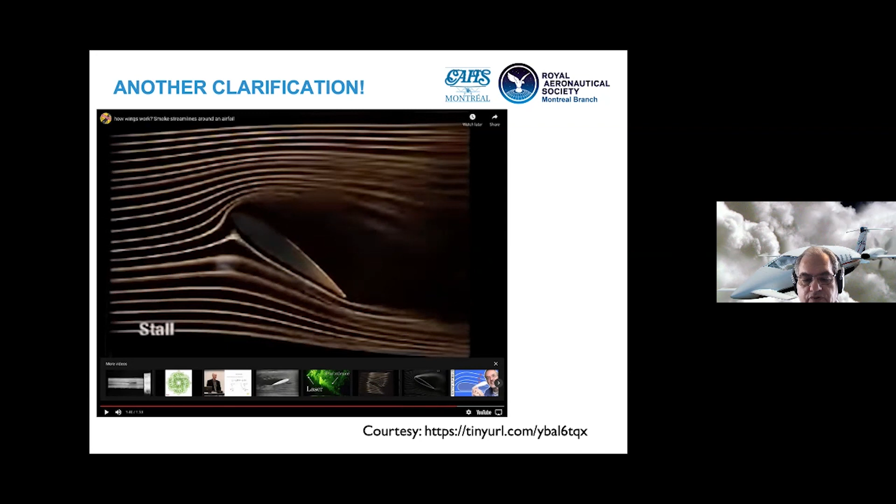At the end of the day, some of the air molecules will be left where they were. Some of them will be moved forward a bit. Some of them will be moved backwards a bit. But on average, they'll be roughly where they started. There is no flow from front to back in terms of a reference frame that's, someone sitting in the grass watching this airplane go by.

Now, what happens when this airplane comes hurtling by is the air molecules send out a cry of alarm to all of their buddies. And the only way they can do that is by vibrating and bashing next to their neighbors and propagating a panic signal to all the other air molecules in front that this beast is coming by. And it's exactly as we would do if someone came rattling through our picnic with a bulldozer. And the air molecules do that. And the signal that they send by bashing into each other moves very, very fast and gets ahead of the airplane and tells all of the other air molecules that this disaster is about to happen.

The speed at which these air molecules communicate with each other, we have a word for. It's called the speed of sound. It's no different than when we talk. What are we doing when we talk? We vibrate air molecules and they are transmitted at the speed of sound to whoever's listening to us.

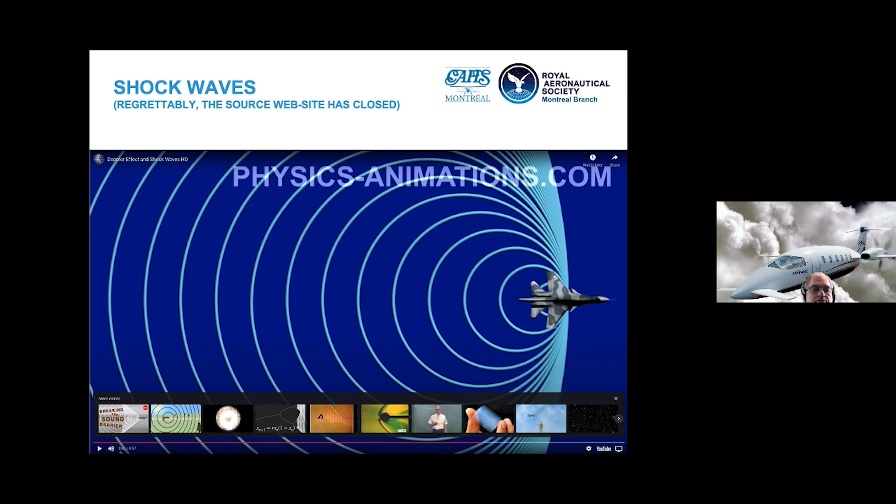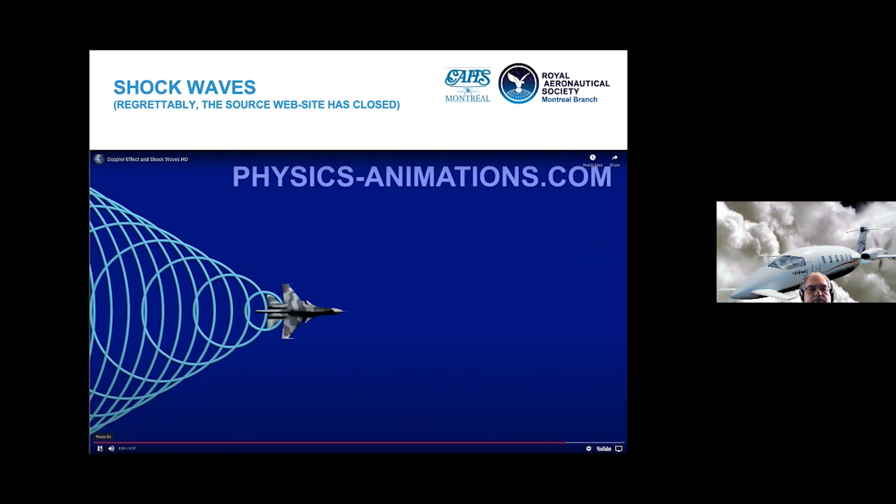And that's bad news. Not as bad as this news, which is when the airplane is going faster than the molecules. So a panic-stricken molecule sends out a cry of alarm, and by the time that cry of alarm has gone out anywhere, the airplane's already passed it. So the first thing the new molecules get is the cry of alarm. And then all of these other panic things that have stacked up saying something terrible has happened historically.

And as you can see, these things all stack up at an angle, and the angle depends on how fast the vehicle is moving relative to how fast the speed of sound is. If you think about these circles represent 1 time increment the speed of sound, 2 time increments at the speed of sound, 3 time increments at the speed of sound. Meanwhile, the left to right is how fast the airplane is going in 1 time increment, 2 time increment, 3 time increments. As these things stack up, they generate what we call a shock wave.

And this, because the shock wave is at an oblique angle, it's not perpendicular, it's called an oblique shock wave.

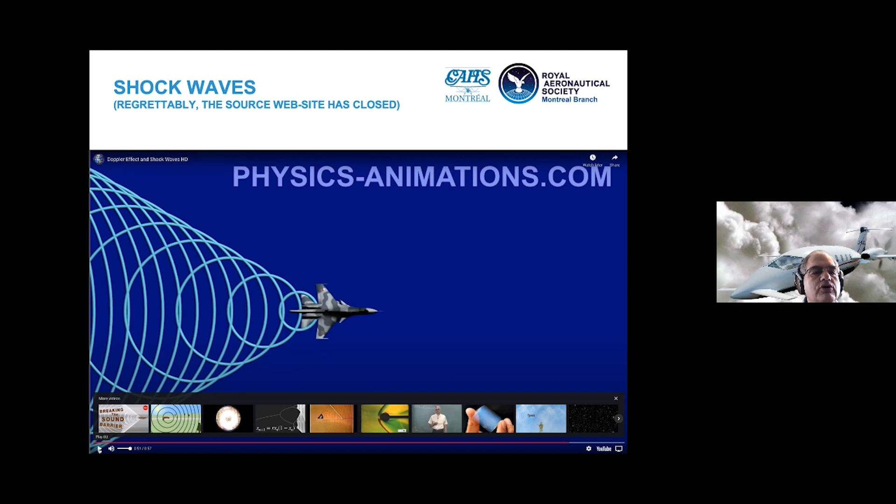Let's see if we can get to the next one.

So a little bit of math, it's what I just showed you. The speed of sound is the radius of these circles that we saw, and the velocity of the vehicle is here. This is called the Mach angle, after Ernst Mach. It's very straightforward: the Mach angle's sine is 1 over the Mach number. So if your Mach is 2, its sine is half, so the Mach angle is 30 degrees.

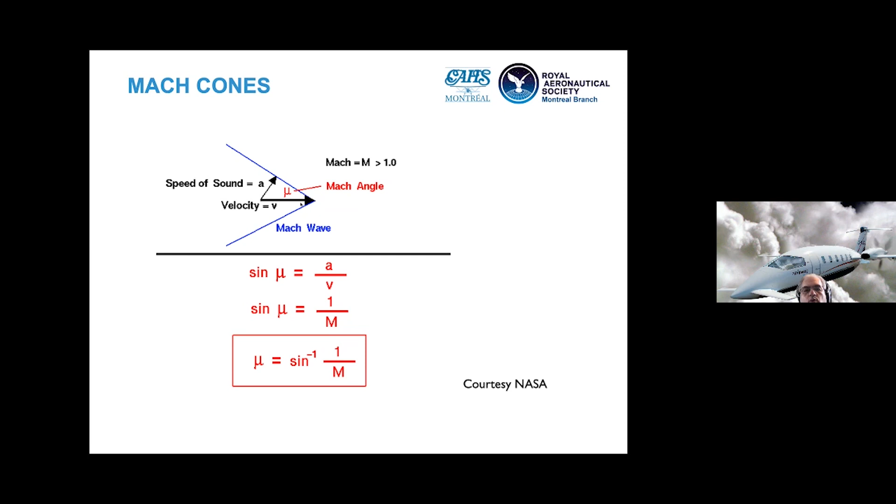So the flow they see is behind these shock waves, and depending on whether they are strong shocks or weak shocks, under some conditions that's a subsonic flow that the wing sees, even when the airplane is going at high speed. But traditionally, with these oblique shocks, this will be a supersonic flow that the wing sees. Remember, the wing doesn't know the airflow is there, the air doesn't know the wing is coming. So everything that happens aerodynamically to a wing is completely different in supersonic flow than in subsonic flow. It's the changes in the airflow direction that decides lift, not the Bernoulli principle that we usually see.

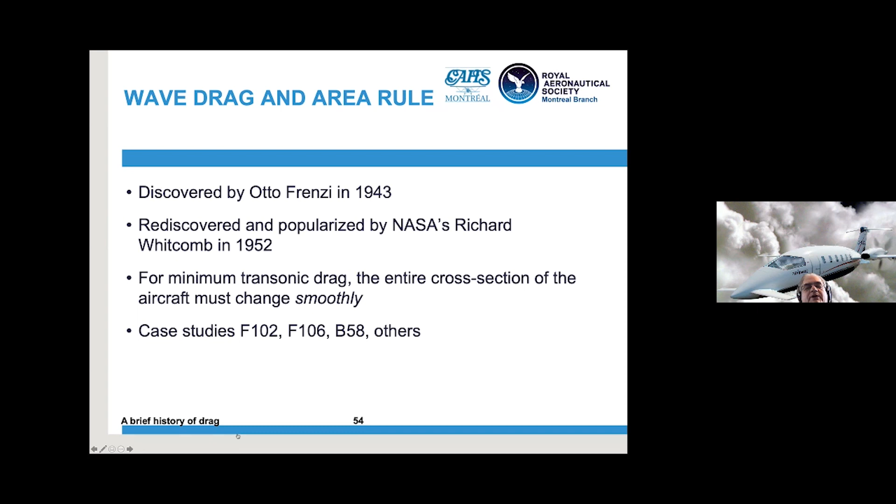Okay, we're running a little low on time, but we're almost there. Wave drag and area rule. Area rule, 1952, Richard Whitcomb once again. It's ideal if the cross-section of the aircraft changes smoothly from front to back, particularly aligned to the expected angle of the shock cones that we're going to see.

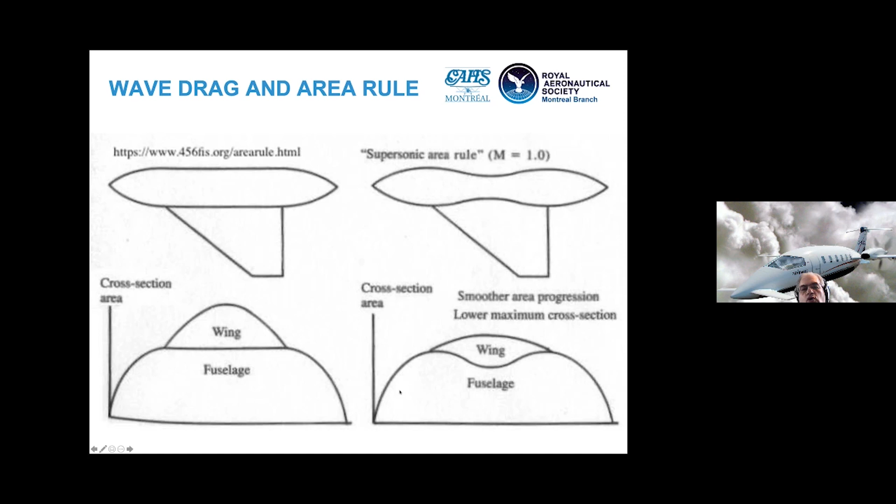Here's an example of an aircraft whose cross-sectional area is increasing in bumps and bulges, much like the space shuttle that we saw. And here's one that is area ruled, where as the wing starts to stick out, let's compensate by making the fuselage suck in to keep the overall shape from front to back smoothly progressing.

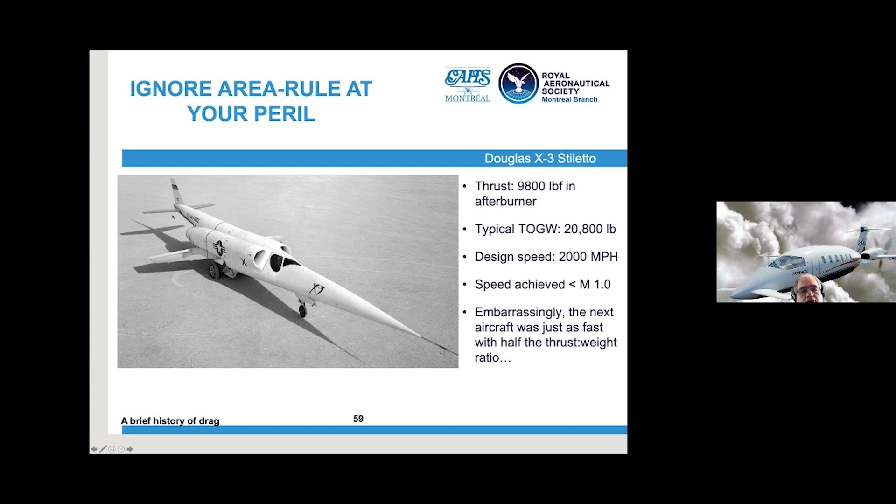Okay, it didn't even get supersonic in level flight. This airplane was just as fast as this airplane, and you could have your martini in first class in one of these. Convair somehow convinced people they needed a Coronado, the world's fastest civilian airplane before Concorde.

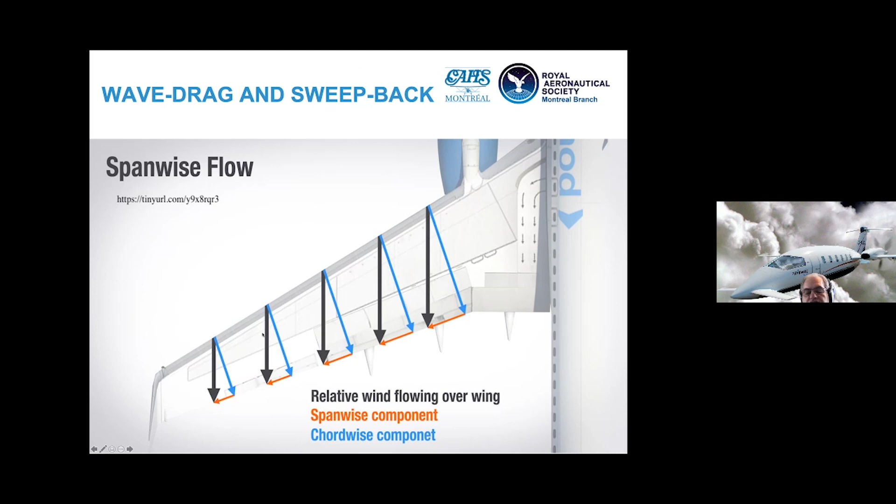Not usable for high orbits, geostationary orbits - it's just too much energy to dissipate this way, but it's certainly usable for low Earth orbit like SpaceShipOne and 2.

This is the picture that's been behind me all the time. It's our own aircraft that we had at the company, one of the nicest aerodynamically designed aircraft ever. The only point I'll make is that not only is this completely smooth, even to the cabin windows here, the cockpit windows.

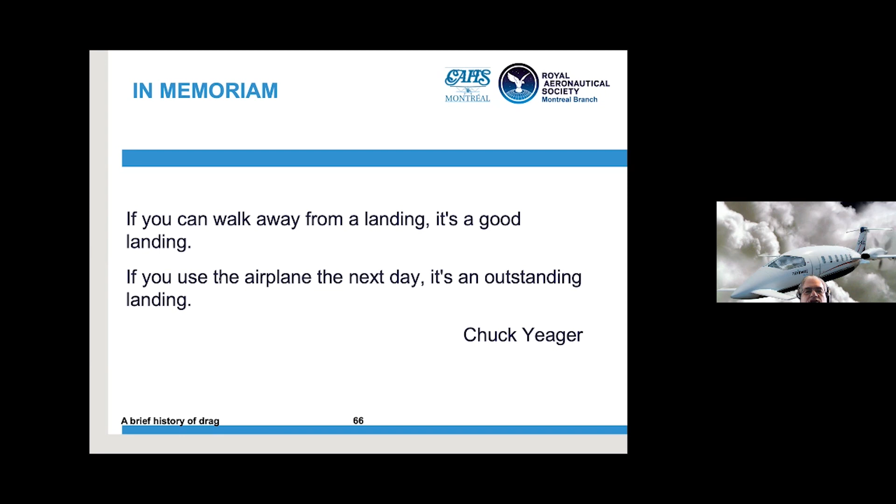I just have to recognize one of my colleagues who departed us earlier this year, who came up with this quote: if you can walk away from a landing, it's a good landing. But I like part two, which is if you can use the airplane the next day, it's an outstanding landing. And of course, that is the famous Chuck Yeager, who broke the sound barrier and overcame the transonic drag that was thought to be impossible to overcome. So good for you, Chuck, and we miss you, and thank you for your contributions to our trade.

So that's the tail end of the Avanti, by the way, but that brings us to a close.

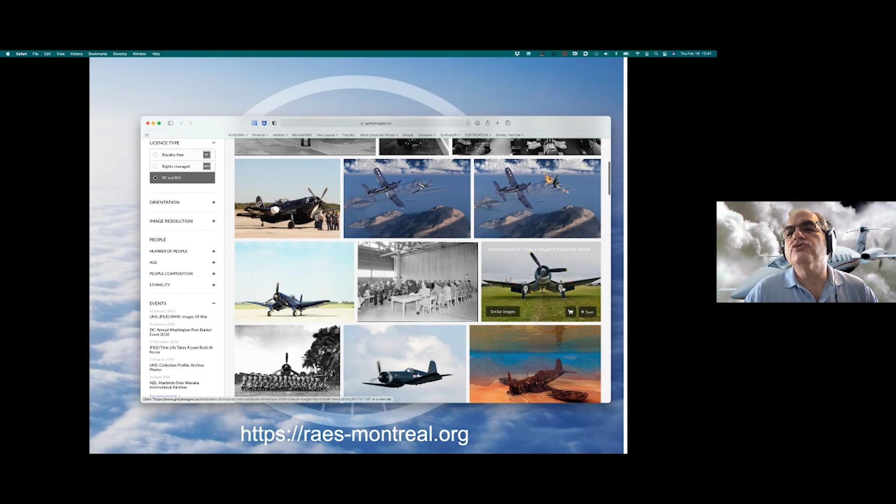Okay, so here's an example of the Corsair, and it shows the point here, right? Here's the enormous propeller, you can see it's barely got any ground clearance as it is. Here's the wing cranked down - why? To get the undercarriage squat and strong. And here it is cranked back up, so I get the dihedral effect that is desirable. The wing is not cranked for aerodynamic purposes, it's cranked to get the gear closer to the ground. Now, the wing root fairing does join the fuselage at right angles, but that's not the explanation for the weird shape of this wing. It's to do with getting the wheels squat while keeping the propeller off the ground, and you can see the propeller doesn't have a lot of ground clearance to start with.

Next question is from Diana. My ferry command research prompts me to ask if you can explain why the Liberator Davis wing was successful.

The Liberator had, just like the P-51, a real effort at a laminar flow wing. Laminar flow intrinsically has less drag, all else being equal, than a turbulent flow wing. Because turbulence - what are you doing? You're effectively using engine energy to stir the air, to basically froth the air up. So clearly, if you could avoid frothing the air up, that's more efficient, all other things being equal. Normally, air stops being laminar in the first probably third of the wing, going from front to back on the top. It gives up on being laminar because the further back you are, the more the pressure is increasing. Remember, pressure is very low near the front of the wing, where the suction is greatest, where the wing has gone around that leading edge curve. As the air goes to the back of the wing, the pressure gradient becomes adverse, and the air molecules have more and more trouble going from front to back until they simply can't do it anymore, and they separate. The inertial forces overcome the viscous desire of the air to stay attached, and it separates. So with heroic efforts, we can get the airflow to be laminar for maybe half of the wing, maybe even two thirds. And that's what I believe the Davis wing was about.

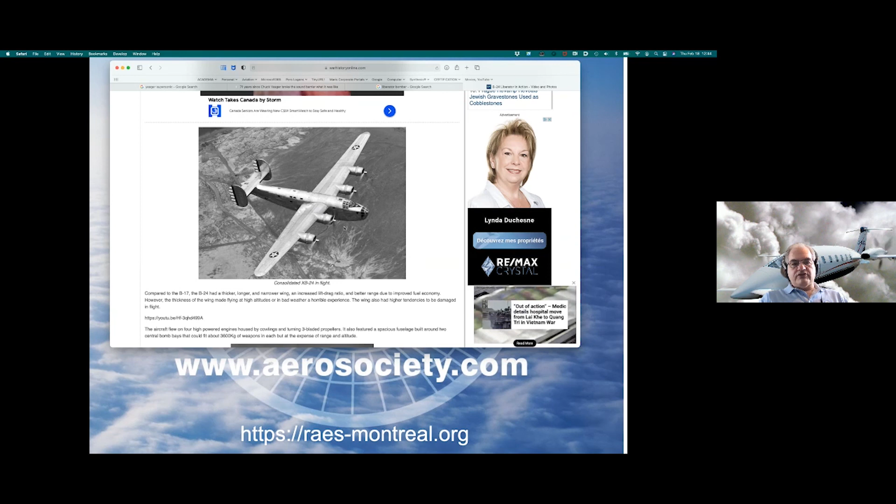Well, what do you see happening here? Here's a tremendously high aspect ratio wing, right? It's not far off some of the gliders I showed you. If you combine the effort to make this wing laminar flow plus high aspect ratio, it means bombers aren't very fast intrinsically, but very efficient at the speeds they were designed to fly at. So you can see the efforts here. There are other bombers with a completely different wing planform, much squatter, fatter and shorter. That's how I'd answer that question.

Perfect, next question from Panos. Thanks John, excellent lecture. Do you have an estimate of the drag coefficient of the airplane behind you and how it compares to airliners?

Actually, I can give you a rough approximation, Panos, because the glide ratio of the airplane is published. I don't remember it, I'll look it up while we talk, because I have it somewhere. It's very close to an airliner, probably slightly worse because it has propellers.

But to give an example, I flew that Avanti and had to do an emergency descent on one flight. We had a windshield crack, and on the Avanti there are no speed brakes, and you can't throw the wheels or flaps out at altitude. So the emergency descent is a 5-degree nose-down flight idle descent, and that redlined the airplane. Think of World War II movies with airplanes in semi-vertical dives - 5 degrees would take this airplane to its redline. So that gives you an idea.

I'll look up what the glide ratio was, but it's going to be very similar to an airliner. I'll come back and drop you the number, because the lift to drag ratio is numerically equal to the glide ratio. So if we can glide 2 miles per 1,000 feet, that's 12 to 1 lift to drag ratio at cruise. That'll give you an example, but I'll look up the actual numbers in a minute. I'll take the next question, Fadi, and look this up while we talk.